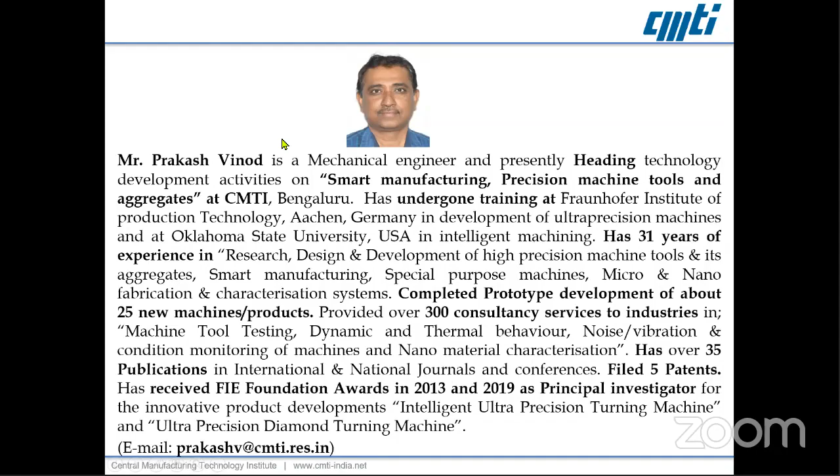He has undergone training at Fraunhofer Institute of Production Technology, Aachen, Germany in development of ultra precision machines, at Oklahoma State University, USA in intelligent machining, and has 31 years of experience in research, design and development of high precision machine tools and its aggregates.

He has worked in smart manufacturing special purpose machines, micro and nano fabrication and characterization systems, completed prototype development of about 25 new machines products, provided over 300 consultancy services to industries in machine tool testing, dynamic and thermal behavior, noise and vibration and condition monitoring of machines, and nanomaterial characterization.

He has over 35 publications in international and national journals and conferences, filed 5 patents, has received FIE Foundation Awards in 2013 and 2019 as Principal Investigator for the Innovative Product Developments, Intelligent Ultra Precision Turning Machine and Ultra Precision Diamond Turning Machine. For further specific queries, you may please write to email ID.

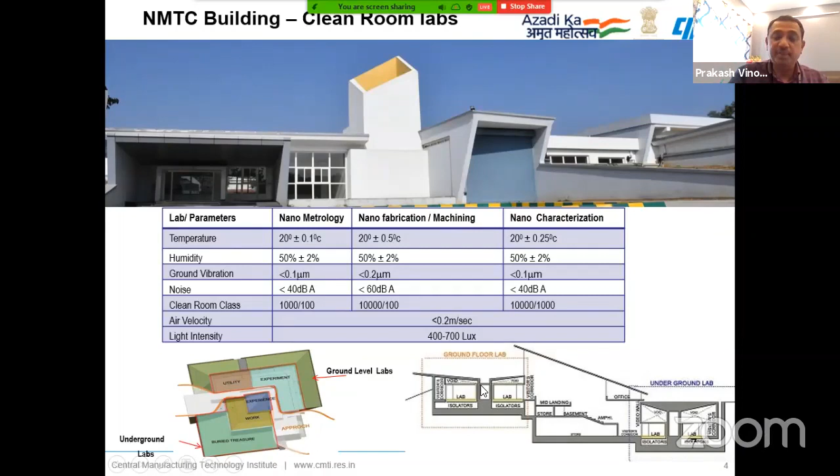Before I go to the technology we have developed and showcase some of the things, I just wanted to show what we have done. Some of the equipment we have procured is for micro machining and nano fabrication. We have around 10 high technology tools meant for nano fabrication work, around 15 high-end tools for nano characterization, and around 13 tools for testing purposes. These are the major tools housed in our laboratory. Apart from that, there are minor tools. In total, we have 50 plus tools available at our facility.

The building infrastructure, as I mentioned, is one of the largest underground facilities in the world, I think, in this country. There we have around 25,000 square feet of clean rooms where we are maintaining temperature and vibration very precisely. Temperature controls are in plus minus 0.1 degree. You may not get that anywhere, I think, in our country. Also, the floor vibration level is below 100 nanometers.

Again, it is state of the art technologies and all. So this is the way we have been working. Civil infrastructure also, according to that, was state of the art, to take care of these environmental issues, and the HVAC and all systems which are used for the clean room, that's also state of the art. So that's the way we have done it.

And our facility is housing 50 plus tools costing around 65 crores. So we have been doing a lot of product and technology development. Around 25 major technologies we have developed, which are already ready for technology transfer. And further we are pursuing this and continuing. We have filed patents and publications: patents 6, other IPR 4, publications 60 plus.

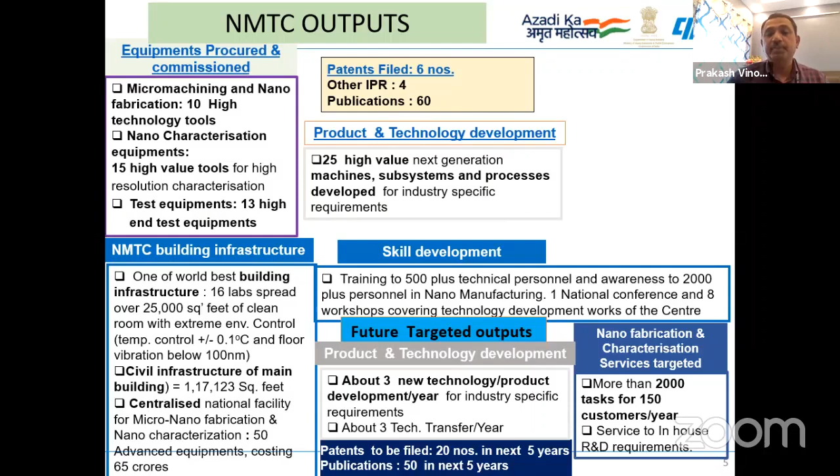And our services, this center has a customer database of around 250 customers from industries and major academia. More than 4,000 individual tasks we have provided and successfully completed. Basically, these tasks are R&D support to industries as well as to academia. Now our services are further growing, and we are targeting more than 2,000 tasks every year. That's the way we are looking, apart from the future technology development works from this center.

So now I will take you to some of the products and processes which have been developed at NMTC, what challenges we have faced, and how we have made this technology industry ready, because most of the technology we have developed has to be globally competitive, price wise and from an accuracy point of view. So we have to look into both.

It is not only a question of development of technology. We have also seen that these technologies are affordable as compared to imported technologies. Then only our industry will adopt this. So these are some challenges which we have looked into, and we have developed successfully. And I'm demonstrating some of the technologies, some of the success stories we are sharing with you.

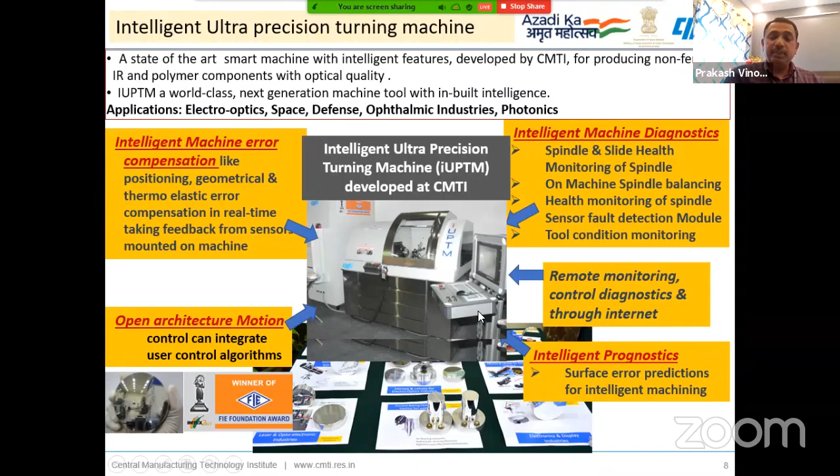So after the development of these modules, we implemented them in our machine and then validated them, like the thermal compensation techniques we adopted, and we started producing jobs which have a radius tolerance of 1 micrometer only. Earlier, after machining 5-6 jobs, it was going out of the range. After implementation of our thermal error compensation modules, we are able to control that error. So this is the way we have done that.

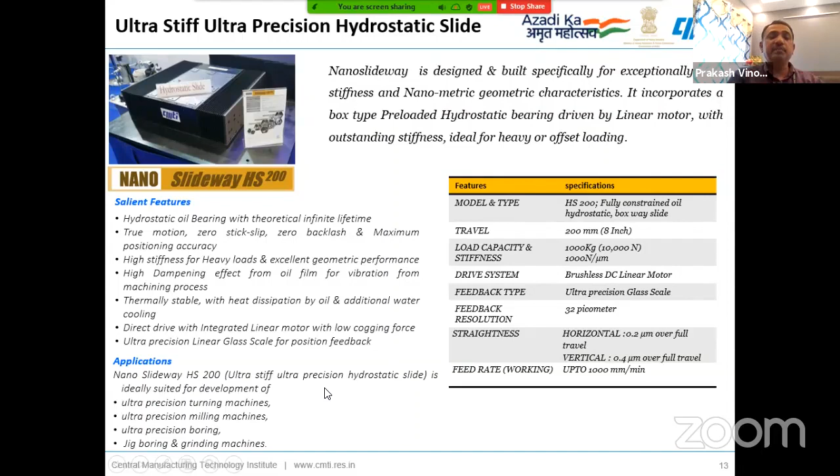So definitely, this slide we have used in our own machine. Plus, this slide technology is available to build other types of machines, such as high precision boring machines, jig grinding machines, jig boring machines, or very high precision milling machines. These slides can be used there also.

Likewise, the spindle. Imported spindles used for ultra precision machines are very costly. If we start importing spindles and building the machine, the cost will not be able to compete with global prices. So we have taken a challenge. In the first machine we developed, we used an imported spindle, but later in our Nano Shape machines, with which we are now targeting the industries, we have developed our own spindle.

So this spindle we have developed for our ultra precision turning machine, but it can be also used for ultra precision hard turning. It can be used for ultra precision milling and micro milling. It can be used for ultra precision grinding machines, and the bearing technology can be used for building high precision measuring machines like form testers. So that is the way we are targeting. We have done that also.

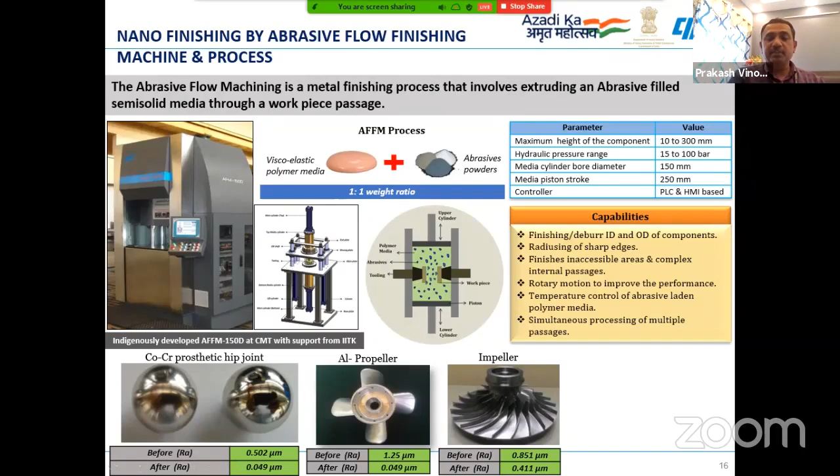Many components from industries, be it biomedicals like cobalt chromium prosthesis hip joints, or from aerospace and defense, propellers, impellers, many things. I think around 30 plus components we have proved on these machines. The technology behind that is a machine developed by CMTI with the initial help from IIT Kanpur, plus also the fixtures. The fixtures play a big role.

As you know, the media has to pass through the component in a proper way, so these are all done at CMTI. We have developed technologies to develop these fixtures, and the media also plays a role. Initially we used imported media, and now we are working on media development so that we are self-sufficient in all aspects.

Another technology, again for finishing, is magnetic abrasive finishing technology. There also we worked with IIT Kanpur initially. The concept is very simple. In this super finishing technology, we are creating a magnetic abrasive media based brush. If you provide proper movement to the job against the brush, then you can finish the component.

It looks very simple, but to realize it practically and make it useful has a lot of challenges. So we worked out how to make it more useful, because if we try to make a magnetic abrasive finishing machine itself, it will have limited use. So what we have done...

We developed an attachment which can be put on a milling machine. This attachment is based on electromagnet-based magnetic effect, and this can be put on the table of any milling machine, 3-axis milling machines. There we have created a cavity where we can form a magnetic brush like this, and then we can rotate the component and move it in this cavity against the magnetic brush.

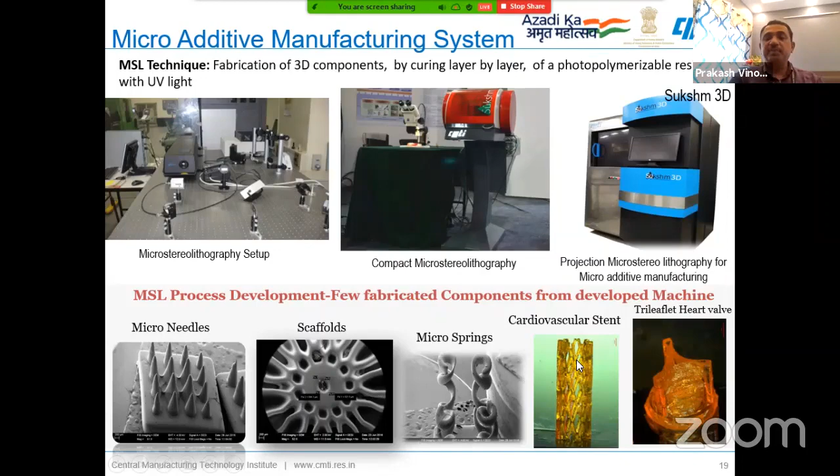We can do that in one shot. That is the technique we have developed, and this becomes a productive machine which industry can use to make cost-effective components. We have proven again that process development plays a big role, and we have proven the process on microneedle scaffolds for tissue growth, various types of MEMS components, biomedical components, stents, and many other things.

So this is a machine which we are marketing for industries. It takes the digital image from the 3D component, and step by step it slices it, and at each step it has its own CAD image that goes to the digital micromirror device, and based on that this works like a virtual mask. Based on the feature at that layer, the mirrors are turned on and off, and UV light falls on this DMD and is directed to the component and polymer resin, and then it is cured, and then it is moved up to cure another layer. That is the way we are building it.

This requires a machine mechanism. We have also created HMI software where the process parameters can be controlled. It is not easy - different materials require different process parameters, so we have to have versatile machines which can do all of this.

So with this, we could realize many components, and many industries can realize many components as well. That's the way we are looking into that.

Another area where we have been working is the development of nano characterization and fabrication systems. Nano manufacturing uses many nano fabrication and characterization systems which are imported. Even CMTI initially imported many of these things, but they are very costly, and technology development needs to be done in our country for that as well.

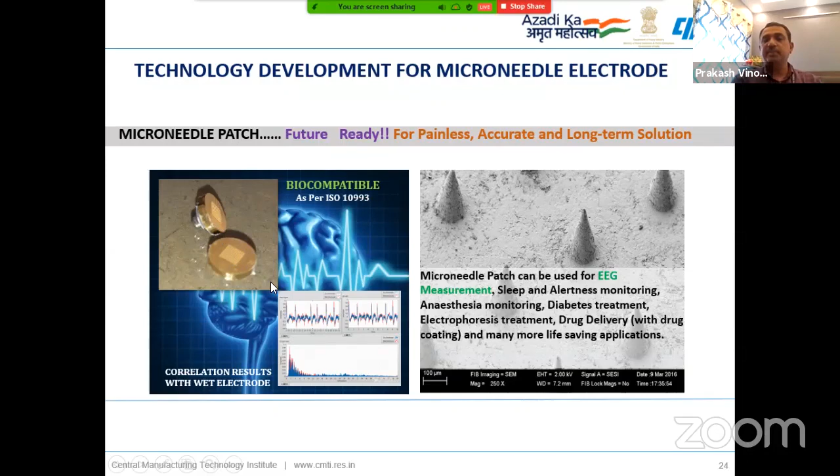If you create an array of microneedles and make it into a patch, it can capture biopotential, provided it is coated properly. Then it can capture the biopotential from the body, so it can be used for EEG measurement, or for sleep and alertness monitoring from the brain. We did benchmarking for EEG measurements and saw that the performance is equally good. So this microneedle electrode technology - using it, industry can create electrodes and supply them for different measurements, maybe for biomedical applications.

Another group works on surface engineering, focusing on thin film coating. Under NMTC, we procured thin film coating equipment, and with that we have delivered many industrial solutions through process development - for surgical equipment, knives, and for watch casings. This is DLC coating, diamond like carbon coating. Using DLC coating of different configurations, different applications are targeted - for watches we look at wear resistance and look, whereas for knives we require some toughness as well as wear resistance.

DLC coating is also used for guideways and for night vision lenses, where the requirements are different - there the coatings are used like a filter to capture the IR spectrum in a particular range. So various applications are possible just with DLC coating. Our team has done that. Likewise, CNT - we have grown CNT, and based on that, various process applications useful for industry have been developed, like super black coating, CNT based UV sensors, and CNT plus metal thermal interface materials, all developed at our center.

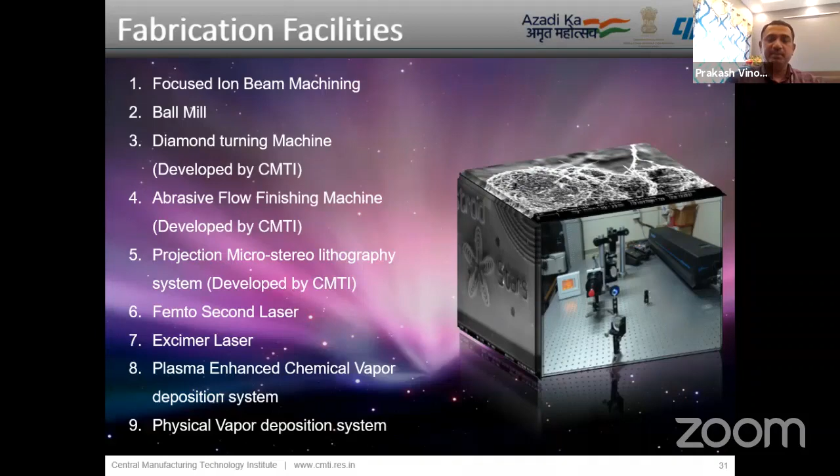It includes a variety of equipment for microscopy, whether optical microscopy, scanning probe microscopy, or electron microscopy using SEM and TEM. We have one of the high resolution TEMs at CMTI. For mechanical property characterization, we have a nano indenter and a micro hardness tester. For optical characterization, we have spectroscopies, interferometers, and other systems. For crystallinity and texture study,

we have XRDs. For particle size, we have a particle size analyzer and a surface area analyzer. We have full-fledged electron microscopy sample preparation tools, around 15 or 16 tools used for preparing samples. All these facilities are available for industries and academia.

Thank you. Thank you, Manju. Just start sharing my screen. Manju, whether my screen is visible? Yeah, your screen is visible. Yeah, it is in full screen. Yeah. Good morning to everyone.

Today I'm going to talk about single point diamond turning. It is basically an overview of the diamond turning process. Single point diamond turning is nothing but a turning process where we use a monocrystalline diamond tool to machine in a high precision lathe. It is also called an ultra precision diamond turning machine.

Here we will be able to get a surface finish down to nanometers and a form accuracy down to submicron level. This is done on a very high precision machine, so that there will not be any vibration or any geometrical and thermomechanical errors which get reflected on the component. You can see the mirror finish on the component. The surface finish is in the order of 5 nanometers or less.

So why diamond turning? For non-ferrous materials like copper, aluminum, and all soft materials, the other processes of lapping and grinding become very tedious, and you will not be able to get a very good surface finish and form. So diamond turning provides a very feasible and prominent process for attaining surface finish in the order of nanometers, and form tolerance down to 1 micron.

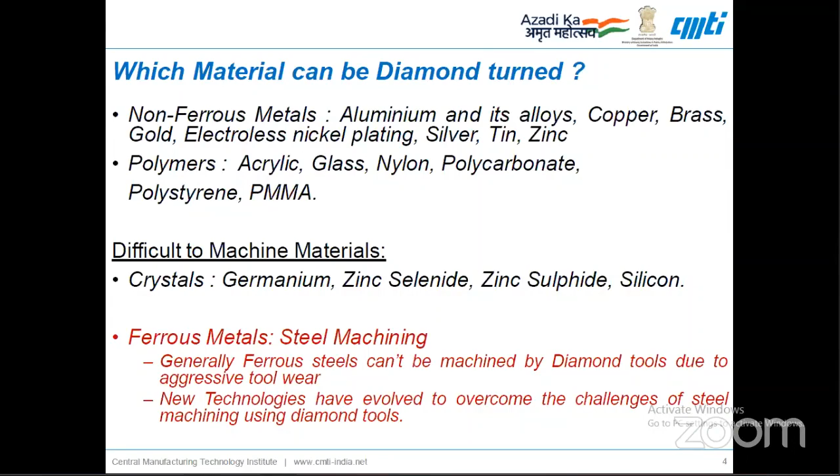So single point diamond turning plays a major role in advanced machining processes. Many of us may be using components made by diamond turning, but few may not be aware of the process as such. So I'll just touch upon the basics of diamond turning over 1 or 2 slides. Basically, in a normal turning process, when we try to cut a material, we'll be cutting along the grain boundaries.

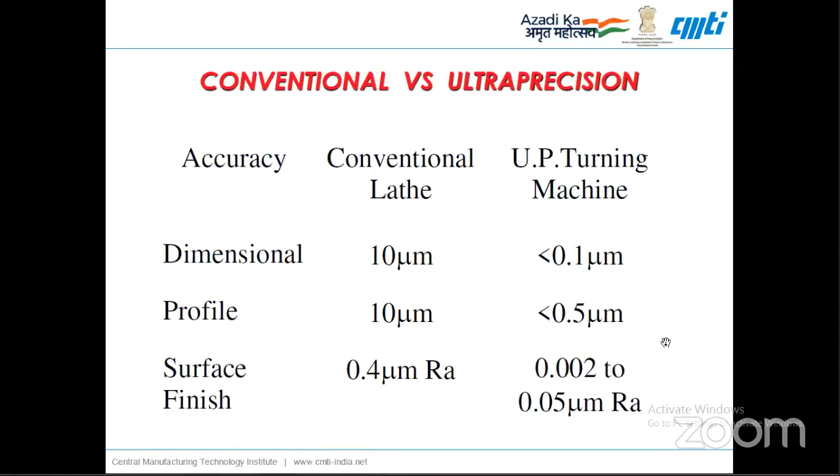So the tool plays a major role here. Basically, what we use is a monocrystalline diamond tool, not a polycrystalline diamond. The entire diamond is a single crystal. Because of that, we are able to have a very sharp edge radius, which makes the cutting very smooth and makes it very easy to cut the materials.

Like any other tools, here also you can have positive, zero rake angle and negative rake angle tools, and you can have a controlled waviness along the nose radius, because that defines what accuracy you can get on the component. And you have cylindrical clearance and conical clearance angles based on the finish cut or rough machining processes. As I was telling you, the edge radius is less than 15 nanometers or finer than that.

So the tools are classified into multiple classifications. The tool can be a monocrystalline natural diamond tool, or a synthetic diamond tool based on the requirement of the user. The profile can be of cylindrical or conical clearance. The waviness can be controlled or non-controlled. If you want to finish very high accuracy components, you may have to go for a controlled waviness tool. And positive rake angle or zero rake angle and negative rake angle are there for machining ductile materials and brittle materials.

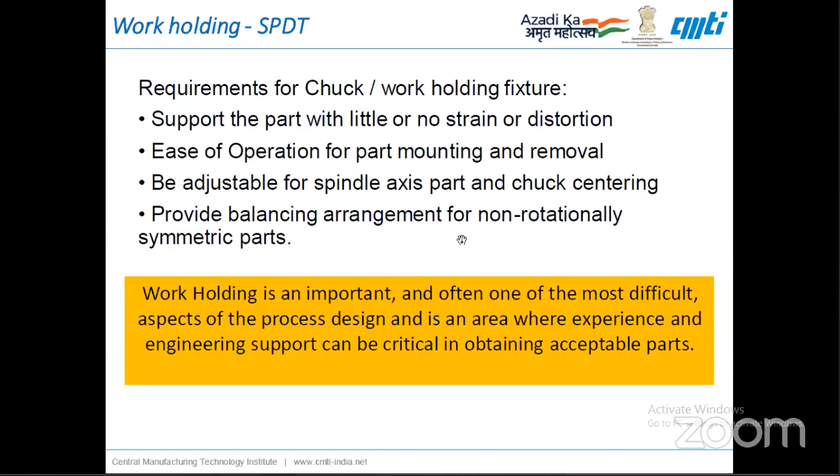And whenever we mount a rotationally non-symmetric component, the spindle rotation has to be balanced also. So the chucking mechanism should have a balancing provision in such a diamond turning process. There are multiple work holding mechanisms, and here we use a vacuum chucking process.

If such vacuum chucking fixturing is not available, when we machine a spherical profile and remove it, the component gets distorted in microns, which may not matter in a normal lathe process. But in ultra precision machining, it affects the component at the micron level, so your accuracies will be poor. So this chuck mechanism is very important in these machines.

And basically, there are multiple design criteria if you want to design your own work holding fixtures for this diamond turning process. It's not limited to rotationally symmetric components; we can also machine non-rotationally symmetric components by designing different types of fixturing for holding the component.

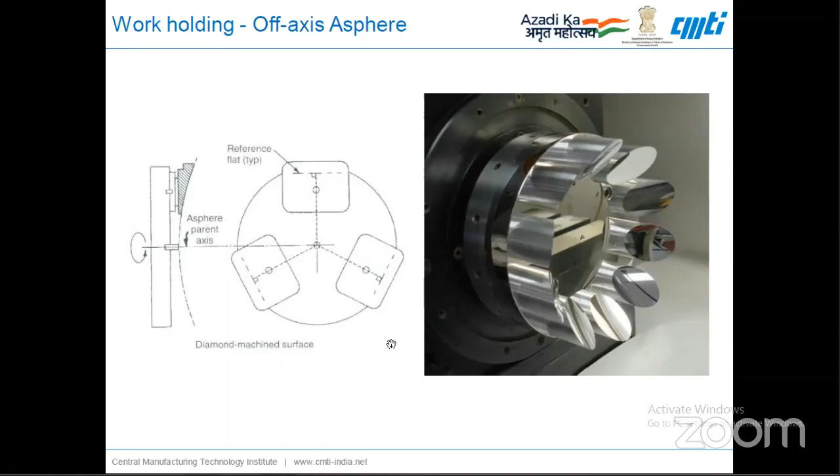Now we'll look into the component accuracies we achieve using the single point diamond turning process. As I told you, it can machine multiple materials like aluminum, copper, brass and so on. You can get a surface finish down to 1 and 2 nanometers in aluminum, brass, copper and other materials. And we can even machine silicon and germanium, which are crystalline materials, IR crystals.

When you try to machine these materials by other processes, they tend to have brittle fracture on the surface. But here we use a process called ductile regime machining, where we use a negative rake angle tool, which gives a very high compressive force on the surface of the component, like germanium, so that the surface isn't subject to cracks. This way we can machine a mirror finish on components like germanium and silicon.

So this can be machined with a very high compressive force using a negative rake angle, and other parameters like critical depth of cut and the process feed parameters also play a major role. The critical thickness for different materials is very important to get a very good surface finish on these brittle materials. So we'll have a look at the applications where diamond turning is widely used.

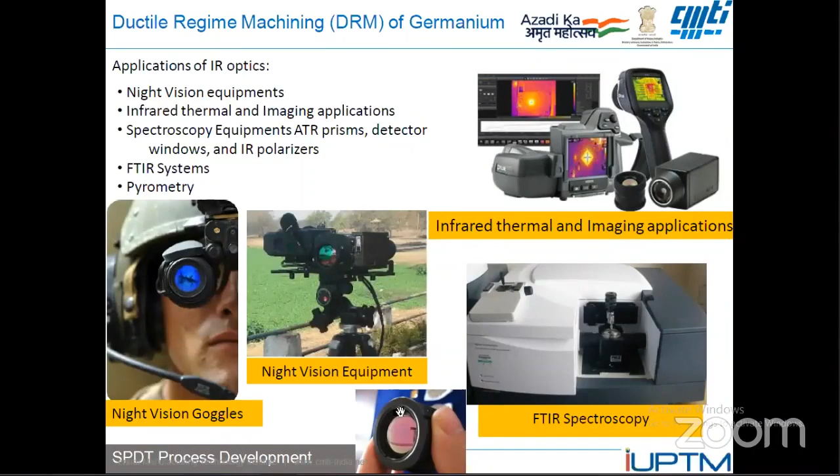And apart from that, in medical industries also, the intraocular lenses which they do for cataract surgery for older patients are also fabricated using this process with smaller single point diamond turning machines. And the contact lens molds are also manufactured using this process. And precision machined components are also done using the single point diamond turning process.

And the automobile light reflectors, and also the photonics application, the LED molds. These are all day-to-day application components which we see around us. So these molds are basically manufactured using this single point diamond turning process, and by injection molding they make mass production out of these molds.

As I was talking about the SPDT process, it is not only the process technology which is important here, the machine tool also plays a major role. It is not that if you put a diamond tool on a normal lathe, you'll be able to get a surface finish in the order of a few nanometers. So the machine tool also plays a major role here, as Prakash sir has earlier explained about the features of the machine.

So this machine has an aerostatic spindle system. Compared to a normal lathe where we use a ball bearing mechanism for bearing supports, here we use air bearing support for the spindle, and we use a hydrostatic slide mechanism for movement of the X and Z axis. That way we get very good motion accuracy of the slides and spindle.

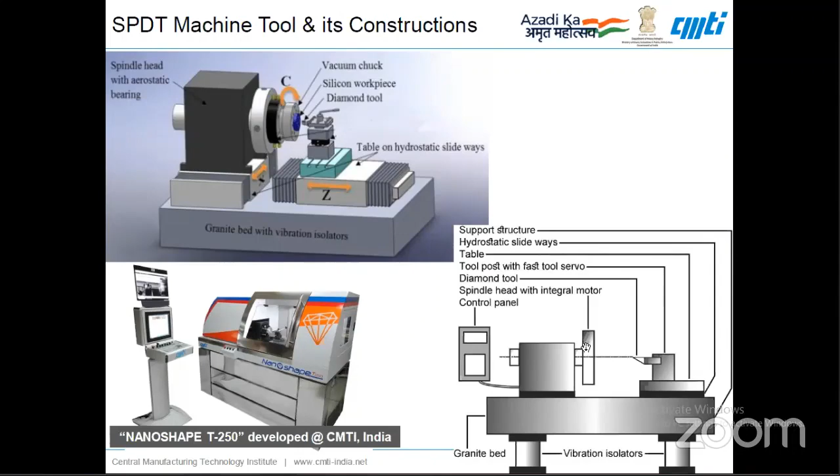As I was talking, there are multiple machine features which also play a major role, which I will not touch much further because our previous speaker has addressed these things, like the structural stability of the machine, the fluid film bearings like hydrostatic and aerostatic spindles, and the drive mechanism. The feedback system also should be of a higher accuracy. The geometrical and positioning accuracy of the machine should be in the micrometer range.

The machine should be able to isolate the vibration which is generated from outside, and it should have a very high-end motion architecture controller. The system resolution should be down to 1 nanometer, and we also should have a distortion-free work clamping system, and we can also integrate error compensation modules to the machine, so that the errors which come out of thermal effects during this high precision machining can also be eliminated in real time.

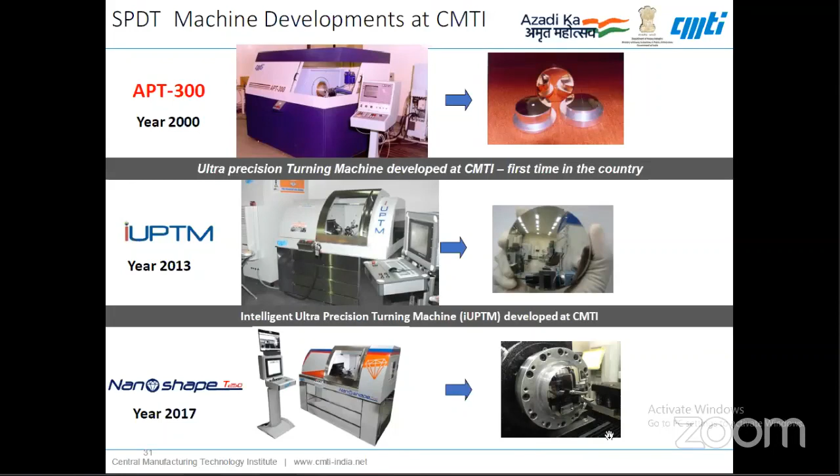This NanoShape T250 machine we have developed at CMTI, and it has been spoken about elaborately in the previous lecture. We can make all these diamond turning applications on this machine. CMTI has worked on 3 generations of development of this machine, and we have been working for the past 25 to 30 years in this technology. The latest launch is the NanoShape T250 machine. That covers the basics of SPDT.

Now I'll just touch upon the advanced diamond turning techniques evolving in recent years. Basically there are 3 classifications I've done: fast tool servo diamond turning attachment, laser assisted diamond turning attachment, and ultrasonic assisted diamond turning attachment. So we'll just start with the fast tool servo. Basically, as I was talking about

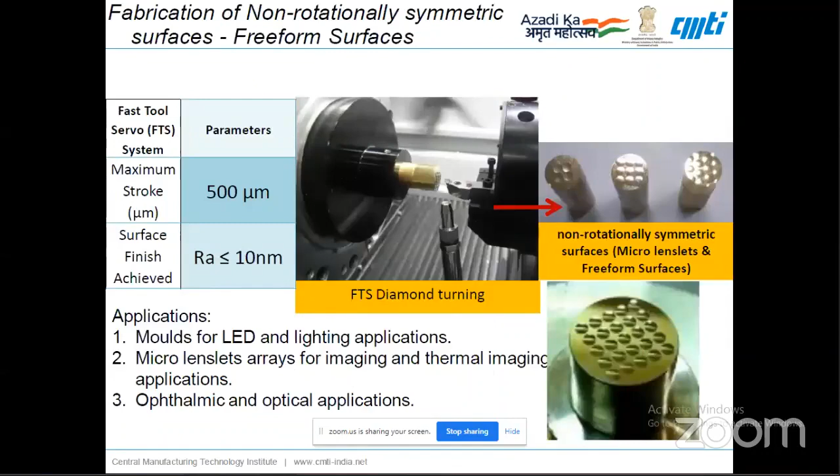As I was talking about the micro lens fabrication. With the fast tool servo mechanism we are able to machine non-rotationally symmetric components. You can see how well you can machine individual lenses on a micro lens mold, and you can also have a surface finish down to a few nanometers, and also a very good profile accuracy on these components.

Not only limited to periodic lens designs, we can also have multiple lens designs like honeycomb structures, and also the compound eye mechanism. These are all the latest advancements happening in the photonics area, and this research can easily be materialized by using a single point diamond turning process to fabricate these kinds of lenses and components.

The other advancement is the laser assisted diamond turning process, where laser light is passed through the diamond tool to machine the component. What happens is the laser passes through the diamond tool and locally softens the material. This laser assisted diamond turning is used for crystal materials like IR crystals, such as germanium and silicon, where tool wear is at a larger rate.

So what they do is use this laser diamond turning process, and it locally softens the material, and again we can machine the material like a ductile material. This is a very cost-effective process to have very good tool life on the component, and we get a very good surface finish. Using this laser assisted diamond turning process, silicon can be machined down to a few nanometers, and also silicon carbide, which is a very tough material, can be done using this laser assisted ductile machining process.

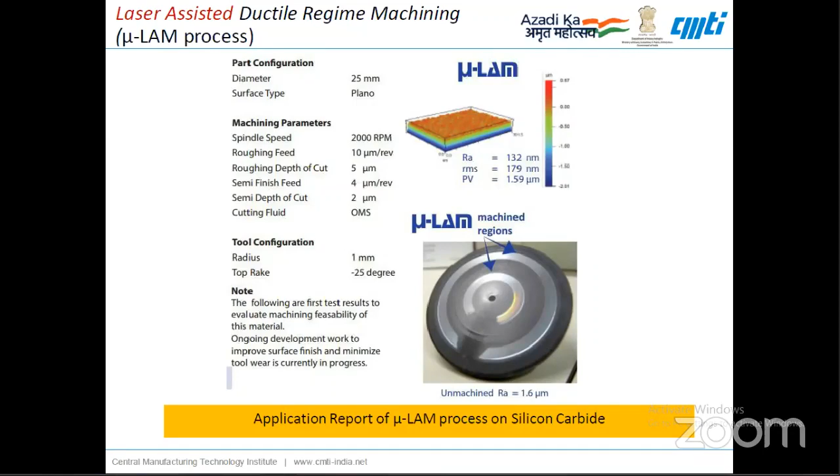One more advancement is the ultrasonic assisted diamond turning process. As I was telling, steel materials cannot be machined using a diamond tool. So what they do is locally vibrate the tool in the ultrasonic range, so that the tool vibrates in an elliptical form, and it will not be in continuous contact with respect to the steel material. This way, the diffusion wear will not take place, as the diamond will not be in continuous contact with the steel material.

So this way, we can machine the components also through the ultrasonic assisted process. There are attachments available in the market which can be bought and integrated to the diamond turning machines we have. The tool vibrates as per a sinusoidal wave, so there will be a very brief period of contact, and it keeps engaging and disengaging the component. The amplitude will be on the order of 2 to 3 microns, and you can machine all steel materials using this process, using a diamond tool itself.

With this basic lecture, I'd like to conclude my lecture on single point diamond turning. If there are any questions, you can post them to my mail ID, which is being posted by Mr. Manju.

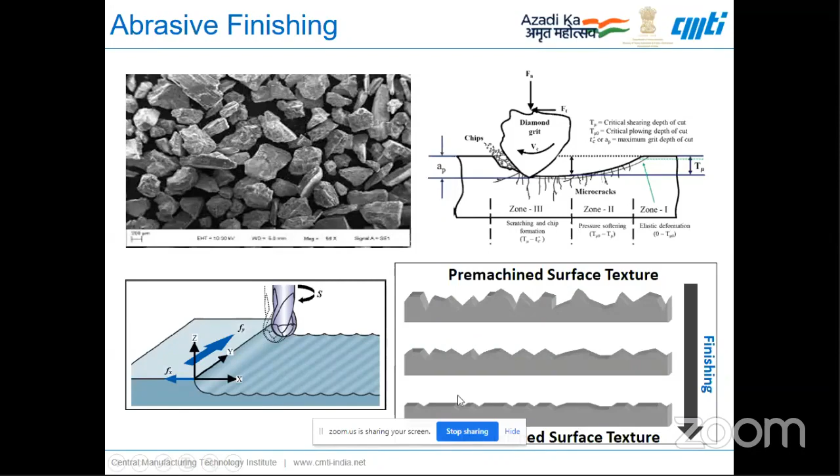How do we measure? We generally use a tabletop and handheld profiler. One must take care that we should measure perpendicular to the lay direction and not parallel to it. That is how we get the actual surface finish values, and some of the roughness parameters commonly used are RA, RZ, RT.

RA is the arithmetic mean, used to indicate the surface finish on any given surface. So when we see a profile created, it is going to have a form, a waviness, and a roughness, all converged actually.

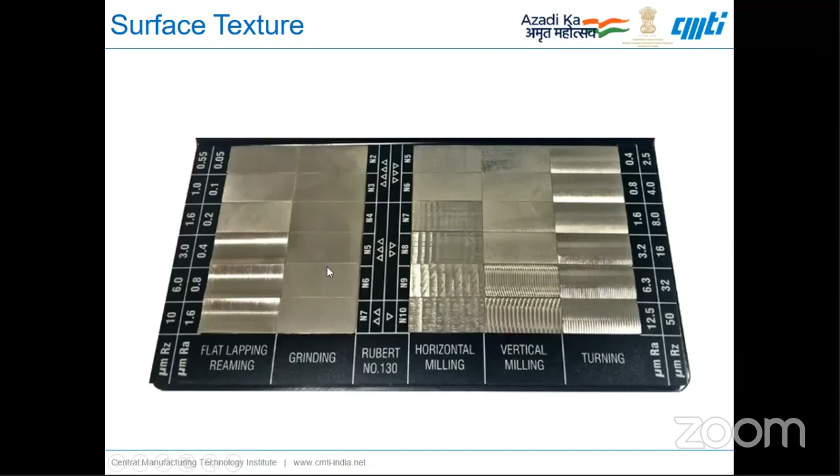You cannot see the lay direction with the bare eye once it reaches less than 0.3 and 0.2 microns. So why do we need this abrasive finishing process?

Sometimes there are different requirements. Sometimes in bearings we need friction to be reduced, sometimes wear has to be reduced, or a better appearance - like if you are doing plastic injection molding, you require a mold with a very good mirror-like finish so that the end component also looks similar. And reflection applications like telescopes and space mirrors, and also in cutting tools - some tools are lapped.

When we talk about nano finishing process, in a product manufacturing life cycle, there is a tendency that the finishing process can actually account for up to 75%, which is very significant. The reason being you need skilled labor, you need very high-end equipment, and consumables are also very expensive.

So when a designer is specifying surface finish in his drawing, he has to be judicious in specifying what is sufficient. If he specifies unnecessary values, it results in the product cost being on the higher side and not being competitive.

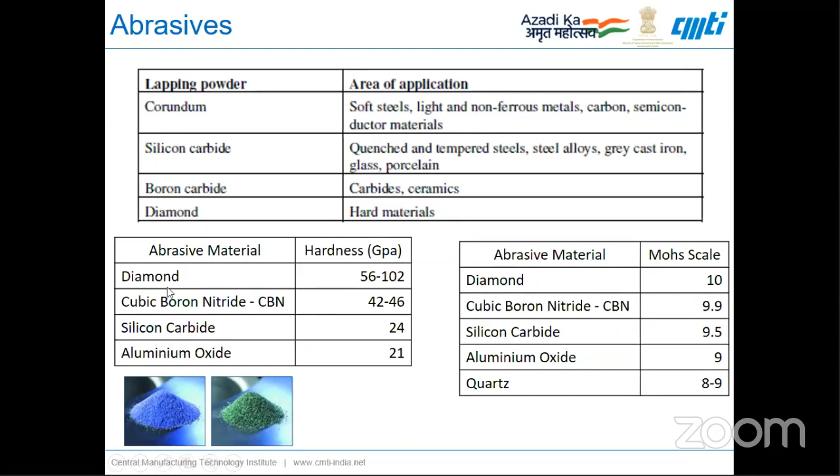Abrasives can range from softer aluminum oxide to the hardest, diamond. These are the commonly used abrasives.

Generally abrasives are very small because you are only going to remove a very minute quantity of material precisely. That is why we need finer abrasives. When we talk about abrasive size, it is mentioned in grit size, like numbers 60, 120, 220, 400, 800, and so on. The smaller the number, the coarser the abrasive is. So here you can see how the abrasive looks like - this is the coarser abrasive with a smaller grit number, and this is the finest abrasive with a larger grit number.

This is how the table looks like when we go for procuring abrasives.

I will briefly touch upon this process before going to some of the advanced processes CMTI is involved in. Lapping is like two surfaces rubbed together with abrasive between them. Both mechanized and hand lapping techniques are there, and we have abrasives mixed with lapping media spread in between the lap and the workpiece.

Generally a metrology artifact, like gauge blocks and all, are generally lapped to, I believe, less than 20 nanometer. That is when you can ring it properly.

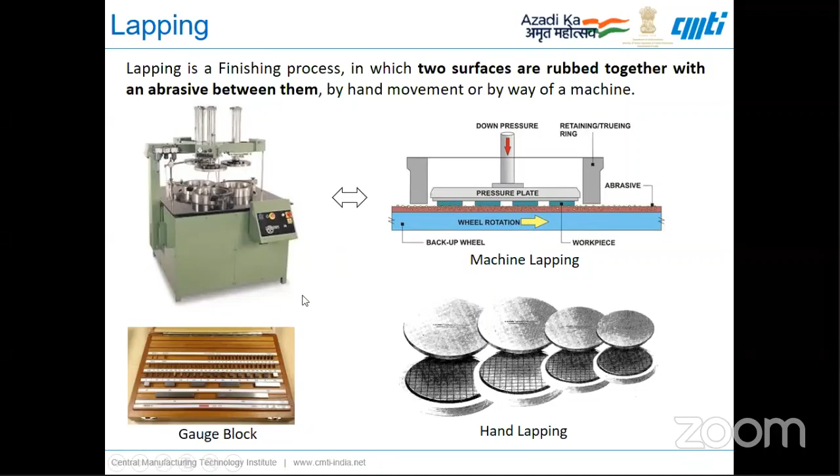At CMTI, a spherical lapping attachment has been developed which can be fixed to any lathe, or it can also work independently. Generally these spherical artifacts are used in metrology, one such application is even CMM calibration. These spherical components also have application in the biomedical field like hip joints and all. So we have developed a spherical lapping attachment which can achieve less than 0.5 micron sphericity.

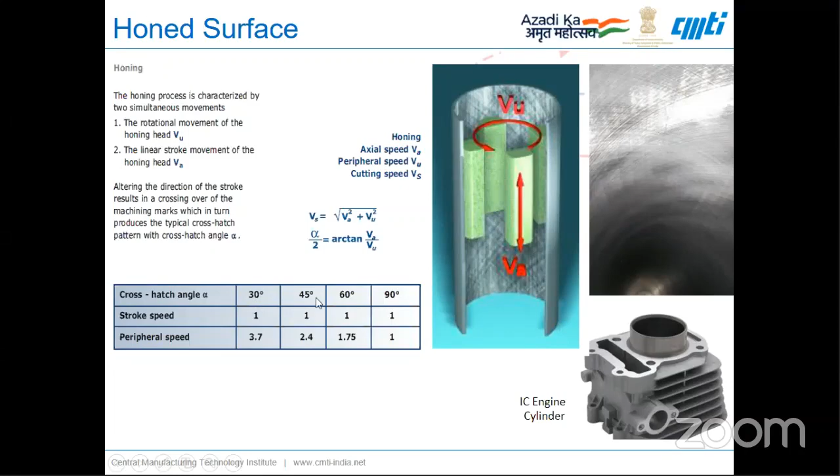When we are talking about engine cylinder liners, we actually require bearing tribological property. We want the surface to retain oil, so that the motion is smooth and no seizure happens. So you have to plan initially: the peaks are removed using a smoother honing tool, and then later on, the metal that has become embedded in the cross hatch is removed with a very fine smoothing tool. So series by series, we remove material so that we leave some serrations where oil can retain. If the same thing is done by lapping, which is also possible, you will end up with a very fine surface, and you may not have bearing tribological properties, and heating may happen.

These are some of the hydraulic components and machine tool components where honing application is there.

Now in real life, the components are not cylindrical or flat. The components are much more complicated, like a knee joint or a hip joint in the biomedical area, or in automotive, like manifolds, fuel injectors, various things, and in aeronautical components, impellers, and some hydraulic components, manifolds, and also in so many machinery components. They are all not very easy to finish by these traditional lapping and honing techniques.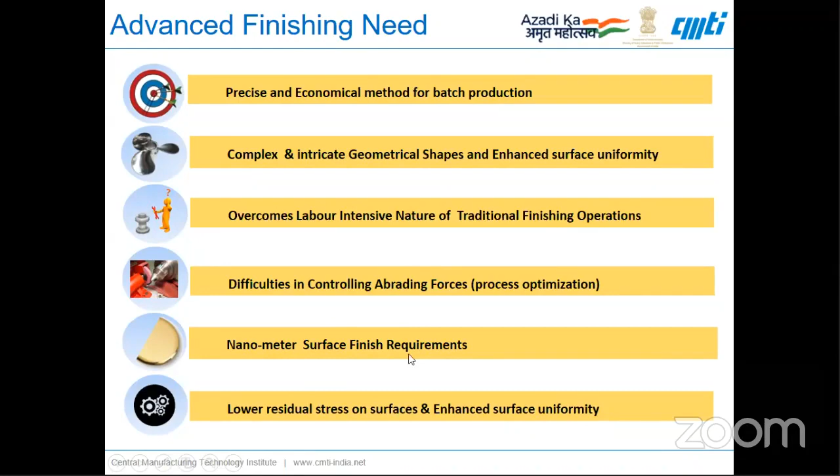That is when we need advanced finishing methodologies for a precise and economical way of batch production of complex and intricate geometrical shapes, and also to have uniform surface finish, to overcome the labor-intensive nature of traditional finishing operations discussed earlier, and for better process optimization whenever required, nanometric surface finish requirements, and lower stresses in the job. These are all various requirements that arise.

So CMTI has developed the abrasive flow finishing machine AFM 150D. We will discuss this. The machine is capable of working at up to 100 bar pressure, and it also has facilities like a rotary work fixture, and temperature control is possible to adjust the viscosity of the media. The features of this machine are that you can do finishing and deburring of ID and OD of components, radiusing of sharp edges and inaccessible areas, rotary motion to improve performance, and temperature control.

So with abrasive media, generally we start from coarser. It's a polymer viscoelastic media. We mix it with abrasives at a 1:1 ratio, and initially we mix it with coarser abrasives, and like any other finishing process, we try to remove the peaks, and then we go for finer and finer abrasives and try to achieve our desired surface finish.

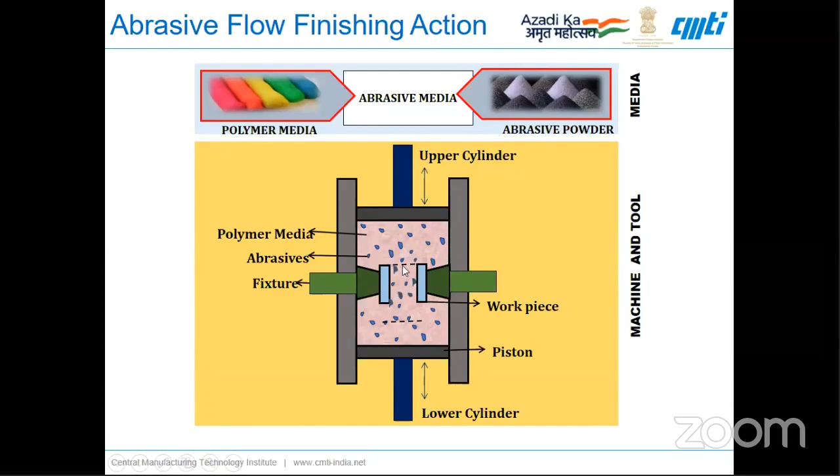So basically the machine has two cylinders in between which the polymer media mixed with abrasives is made to reciprocate up and down, and this simple cylindrical hollow tube work component is shown here, within which the media tends to move up and down. So after various cycles the job is finished. Basically the media is a viscoelastic media. So the elastic component tends to have a radial force and the viscous component tends to have the axial force. That is how the inner wall of the component tends to get finished.

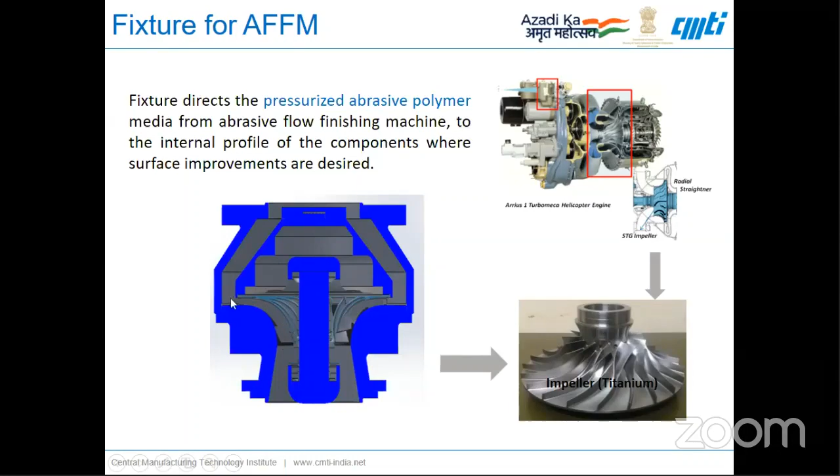So regarding the market potential of AFM, generally it will overcome time-consuming processes. Also the finishing cost here is significantly lower compared to other processes, and we are able to finish high precision components in an economical way. So far there is no indigenous development of such a machine. Worldwide, only one or two makers are there at present making such machines, and they are in heavy demand. Technological solutions: aerospace, defense, medical, automotive. We are also serving academics. We are providing finishing service.

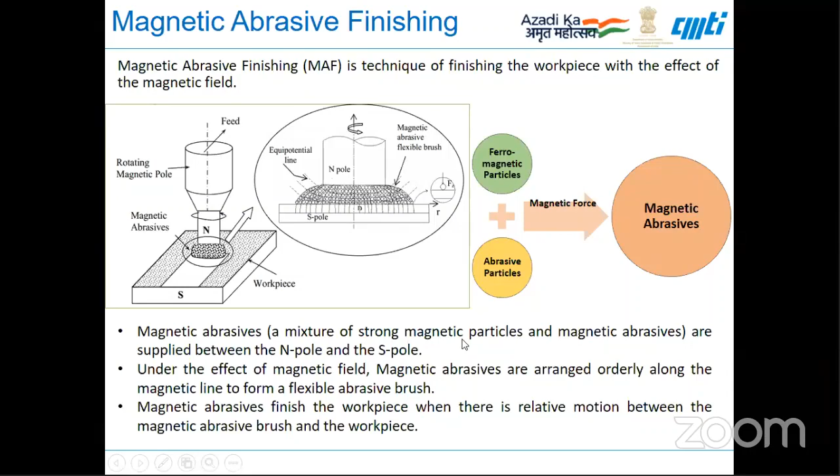Next super finishing process, an advanced finishing process: magnetic abrasive finishing. When we talk about a magnet, there is a north and south pole and the lines are flowing between these poles, which we are aware of. We make magnetic abrasives which are attracted to these lines, and then through relative motion between the tool and the workpiece, finishing happens. The media is a special media developed by combining magnetic particles along with abrasives, because as we know the abrasives are non-magnetic.

This is for some trial components, and internal components also we can finish. So the finish value up to 20 nanometer is achievable. Ra up to 20 nanometer is achievable on all these components. So you can see the media, how it is attracted between north and south pole inside the cylindrical tube, and when we rotate the job, the finishing happens.

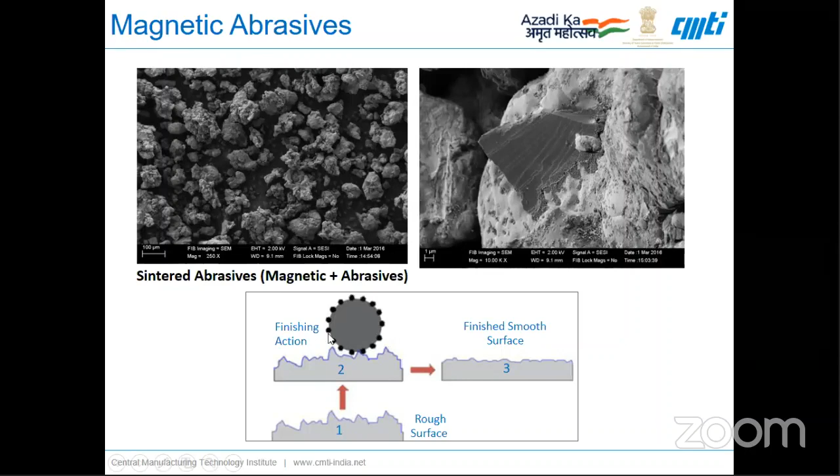We have developed abrasive media. Okay, so this is a magnetic abrasive media. Initially, we have sintered and broken into particles. So here we can see how the abrasives are projecting all across the media. And initially, we will have a rough surface with several peaks, and then this is an abrasive particle with abrasives along the outer surface. So after the cutting action, we achieve the smoother surface.

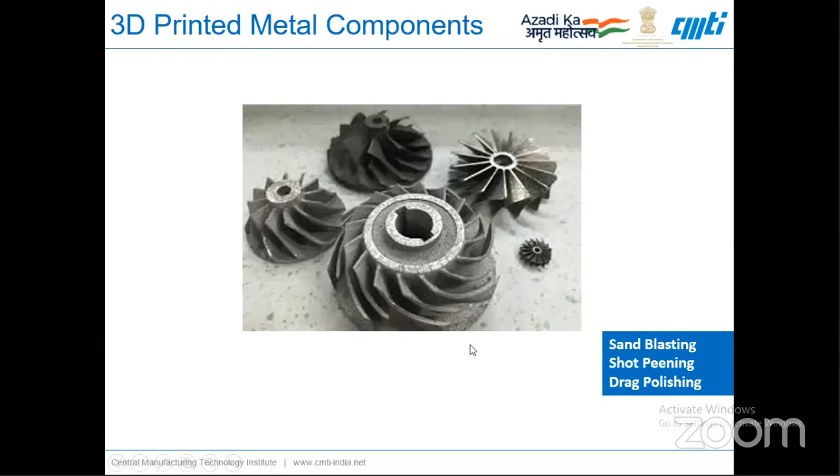So now I'm finished with whatever areas we have worked on at CMTI. Now I'll give a short glimpse of real life components and how to finish them. 3D printed components generally are known to have very high roughness values because of particle size limitation. So generally, to start with, we have to have sandblasting, shot peening, and drag polishing to reduce the surface roughness, and then we can go about with AFM or other finishing processes.

So for cylindrical tubes, there is an alternative like the electropolishing process where we can again achieve very good surface finish, but the only drawback is uniformity is an issue in electropolishing. When it comes to optics, I think SPDT has been discussed already in a previous lecture. The alternative with respect to abrasive finishing is that fluid jet polishing techniques and bonnet polishing techniques are available, which are again able to provide a nanometric surface finish.

Belt grinding is again a process where coated abrasive belts are used. It is a very versatile process. It can be used up to say 100 nanometer. We can have surface finish on flat and cylindrical components and other intricate shapes.

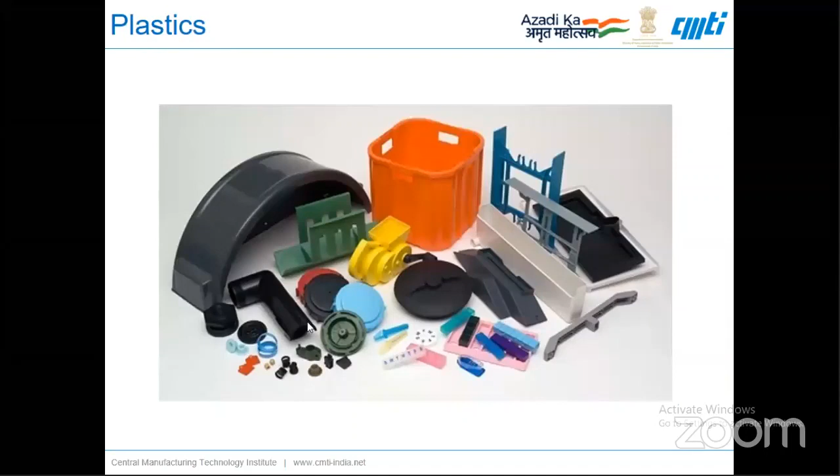Now, what about plastic components that we see in real life? Plastic components generally arrive from molds, which need to be finished. And though there are so many advanced nano finishing mechanized processes existing, people still tend to do it in a manual laborious way using bristles and brush type tools, handheld tools, which has a scope to improve in future by adopting these advanced techniques like AFM.

And generally polishing is one thing where actually material is not removed, unlike any other super finishing process. It just gives the luster on the surface. Because in polishing there is only rolling and sliding, whereas in other finishing processes there is rolling, sliding and cutting, and cutting is the major thing. So this only removes the top peaks and enables light to reflect. So it is not a super finishing process, but for many applications it is good enough.

So to begin with, these are some of our activities. We work basically on diamond-like carbon, carbon nanotubes, and also we synthesize metallic thin films. In diamond-like carbon, we work on night vision applications, high hardness, hydrophobic, and low coefficient of friction. In carbon nanotubes, we prepare super black coatings, sensor heads, and now currently we are working on rapid cooling technologies, that is thermal interface materials. And metallic thin films, we do basically micro heaters, catalyst layer coating, and also for metrology applications.

We have basically two equipment, a plasma enhanced chemical vapor deposition and a PVD. So we have our product called Kavach DLC, which we have filed for a trademark already, and that is with respect to our diamond-like carbon coating.

So today's contents are going to be, because we have only about half an hour, I'm going to introduce surface coating, surface engineering, a few applications of that, and talk about CVD, PVD, and what systems we are having. Just introduction to CVD and PVD, and then I'm going to talk for a while about the coating activities that we undertake at CMTI.

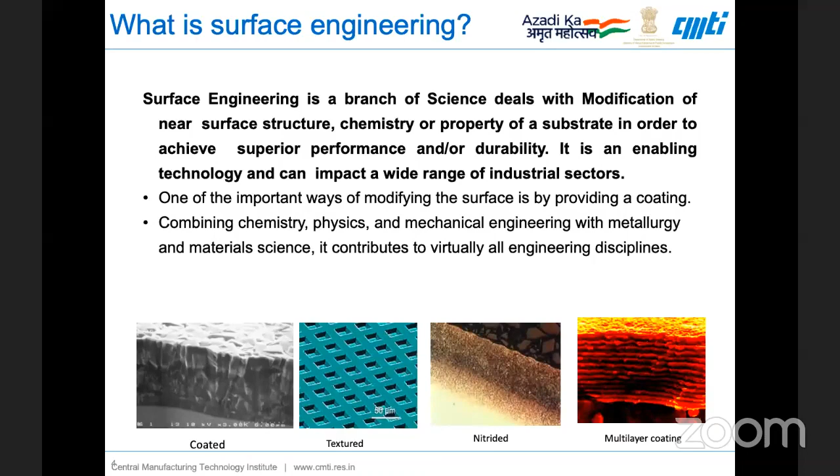So today what we are going to emphasize is on coatings, essentially. What basically a coating is, in simple terms, is a layer of material or fluid that is applied to a surface of a substrate to impart a functional property such as wear resistance or corrosion resistance, or hydrophobic nature, etc. A coating can also be applied to impart aesthetic value to the product.

So what is surface damage? When we talk about surface damage, it is something like you keep a material in rain. That's an environmental issue. If you keep a block of iron in rain, what will happen to that? Due to humidity, oxidation, rain, or icing, there will be change on the surface of the iron block. It will start rusting, it will start corroding. You will see that rust forms and small pieces of rust come out. This is because of environmental issues.

Let's say you bring it near a flame, then it has a different sort of surface damage. If you increase it to high temperature, then there is another sort of damage. So let's say you dip it in acid, or you dip it in an alkali, or you expose it to some salt. Then you have different kinds of damage. So probably it eats away or forms a different sort of layer, or you find some sort of white formation on the surface.

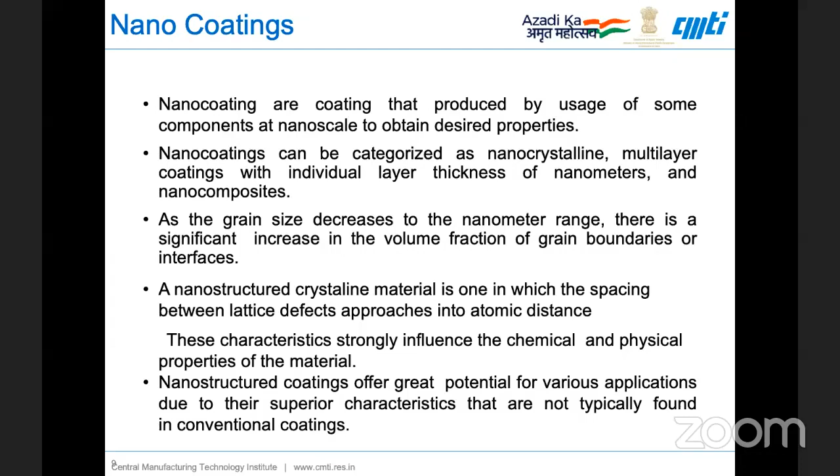In fact, even today, even your toothbrushes have some sort of nano coatings. The bristles have some nano coatings so that you are able to remove the plaque very easily, and so on and so forth. So what are the essential differences between conventional coating and nano coating? Conventional coatings are usually micron to mm scale structures, whereas nano coatings are nanostructured materials and are in nanoscale thicknesses.

Conventional coatings have high contact tension between the water droplet and the coating layer, whereas here contact tension is much reduced, and you can have water repellence sort of phenomena. With conventional coating, moisture can penetrate into the housing.

So let's say you are still having an electroplating, and you take a microscopic image, by which I mean an SEM image. Let's say you have done a chrome plating on steel; you will still find a 1.5 to 2 micrometer gap, which is not possible to see using naked eyes, and hence even moisture can penetrate through that small gap.

Whereas nano coating is basically atomic addition, and hence it's absolutely a zero gap sort of phenomena. And that's why it's much better. You won't have any sort of moisture penetration there. Of course, surface roughness is typically based on the sort of coating that you achieve. And 5 micrometer, it's not 5 micrometer exactly. It depends on the sort of process, and it can range anywhere from a few microns to even 25, 30 microns.

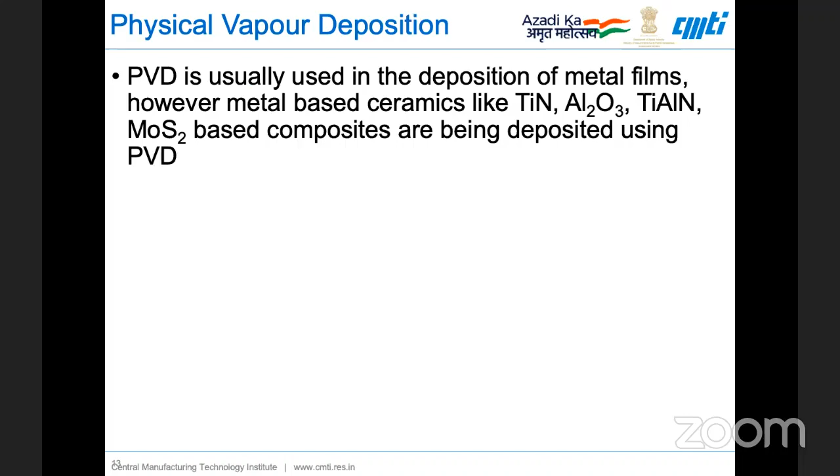Whereas with physical vapor deposition, it's basically a physical target that you are having, and the physical target is etched out when you let some sort of gas inside, and this is physically transported from one place to another, and then you are able to deposit metal, ceramics, and even titanium nitride, aluminum oxide, titanium aluminum nitride, molybdenum disulfide, etc. And you can start making composites using this.

So PVD processes are now widely used for making coatings. For example, there are a lot of companies which make gold coated god artifacts. So if you have some god idols, they do a thin film pure gold coating of about a few hundreds of nanometers on that to give that gold feel.

Gold coatings are also done on a lot of jewelry. For example, there are certain costly watches where they coat gold on straps and on the watch case. So with respect to aluminum or titanium, these are also done for various other applications.

Talking about the pros and cons of this process, it has excellent process control, low deposition temperature, dense and adherent coatings. You can play around with different alloys, and different compound coatings are also possible. PVD processes are typically vacuum processes, which come with a certain high capital cost, and then they have size limitations as well, and low coating rates.

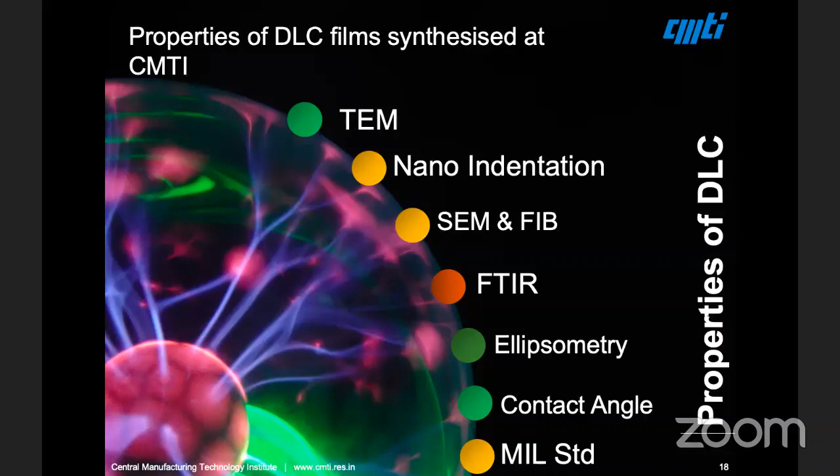Some properties and examples that we have developed, I'm going to show you in the upcoming slides. The TEM image of how diamond-like carbon looks like, you can notice the distance between the lattice points here. The D-space corresponds to about 0.205.

This corresponds to cubic diamond, and you can see some sort of a crosshatch structure here, which signifies that it's kind of polycrystalline in nature, and these are all the amorphous regions of the entire film. The hardness value when we experiment with what CMTI has developed, the mean hardness is close to about 32.7 GPa, and the coefficient of friction goes down to as low as 0.04. This shows how the coating looks like.

This is one layer, this is silicon wafer until here, and beyond this is diamond-like carbon. These are the two layers of coating, and you can see how well this region is, you will not find any sort of gap here. It's atomically bonded.

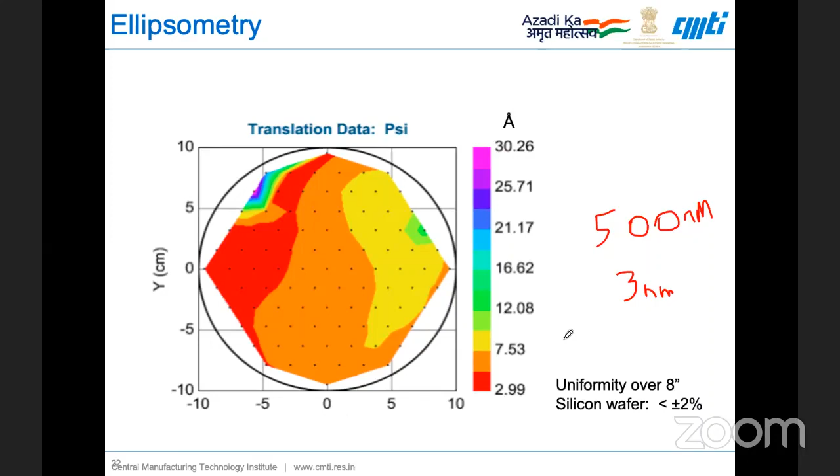This is useful when you coat diamond-like carbon on solar panel protection glasses. What happens is that you have rain, sand, abrasive particles, and you want to self-clean it, so that way you have to form beads. When there is a certain angle, if you treat it with a very fine thickness of DLC, there is some transmission available, as well as the water beads out, cleaning the surface. That is where these applications are useful.

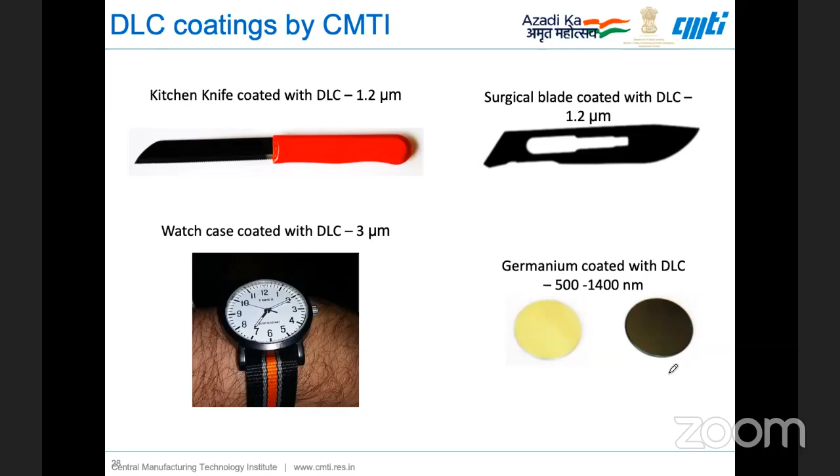This was for night vision camera lenses that we have done, coated germanium, for one of the American customers. As I mentioned two slides ago, DLC had to be coated for both hydrophobicity and also scratch resistance on solar panels. So this is what we have proposed as a solution, which is possible even on glass.

This is for low coefficient of friction, wherein for machine tool applications, you need guideways which do not have backlash and are extremely smooth. These are the places where you can coat with DLC. You can also coat it on plastic as an underlying layer so that you don't have scratches on the plastic. This was a research which, if I'm correct, Nokia started for their mobile phone bodies a long time ago, but I'm not too sure.

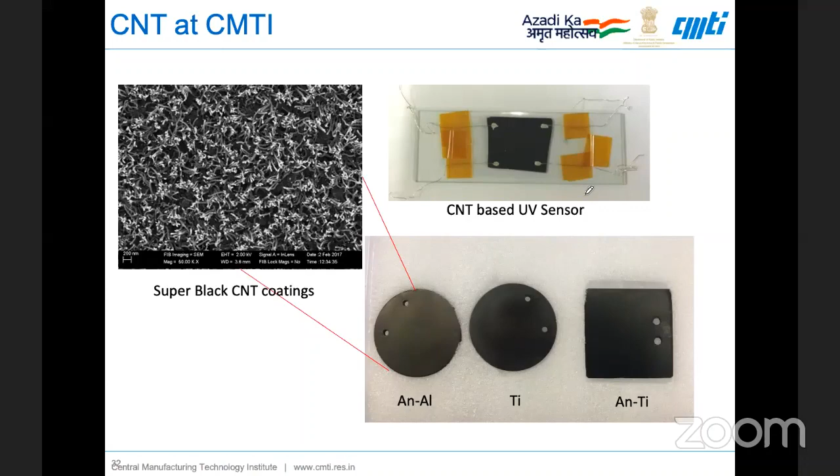We also have the CNT based UV sensor that we have developed for applications such as engine combustion monitoring, to predict whether the combustion is going on properly or not. This is one of the applications we have developed. It's just a sensor head, followed by encapsulation of CNT using DLC.

This is basically for a thermal interface material that we have been trying around. We have the TEM of that and how it looks, just to show there is both the CNTs as well as the DLC which have been formed. This was my cover image of today's presentation, and this is titanium nitride.

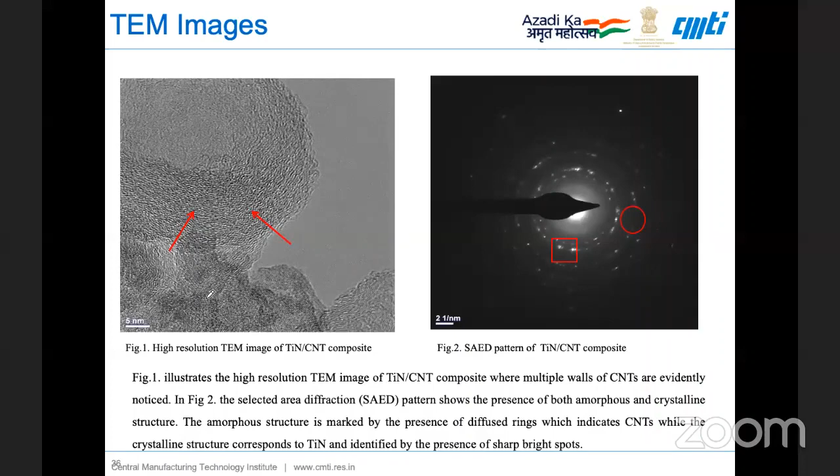So I'm not going to go ahead further.

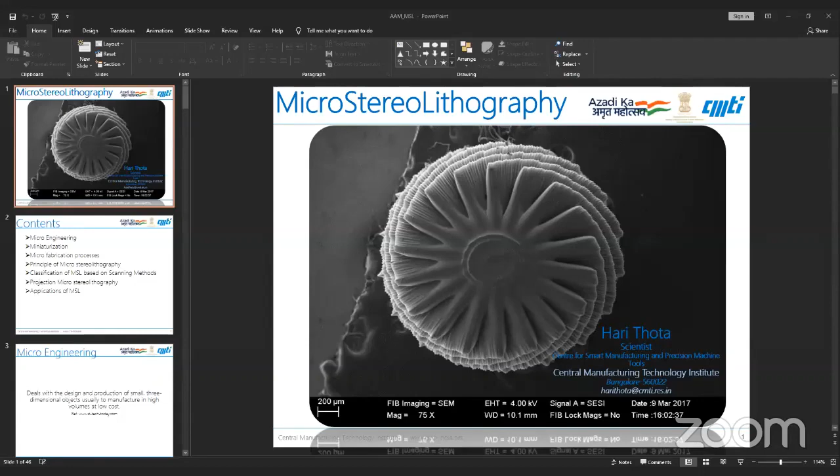Yeah, fine. I'm going to present the topic microstereolithography. Hope my screen is visible. Yes, it's visible. Thank you, Mr. Manju, for the introduction. I'm Harikrishna Satish Thota. I'll be presenting on microstereolithography, focus and applications of microstereolithography. The content will include microengineering, miniaturization, microfabrication processes, principles of microstereolithography, and classification of scanning.

Sorry for the interruption. Hello, sorry for the interruption. I think the audio can be a little clearer.

Louder. There is a slight breakage in the voice. Yeah. Is it okay? Okay. I'll try to fix it up. Yeah. So is it okay now? Yeah. Now it's fine. Thank you.

So, microengineering. Basically, microengineering deals with the design and production of small three-dimensional objects, usually manufactured in high volumes at a low cost. This definition is taken from the reference given here. Generally, we need miniaturized versions of things. Earlier we were using very big mobile phones with limited features. Now we are using mobile phones that are very handy and have multiple features in the phone itself.

So miniaturization is a key technology for making devices smart as well as more efficient. Here I'm giving an example of a blood cell analysis machine. This uses a micro cell cartridge. This tabletop equipment can be miniaturized by using a microfluidic chip embedded in a device which can be connected to the mobile phone, and the diagnosis can be done with a drop of blood, and the entire report can be seen on your mobile phone. This has happened because of miniaturization of certain technologies.

Not only in electrical and electronics engineering, but also in mechanical engineering and materials processing technology. These are the advantages of miniaturization: easy to handle, easy to mount, low cost, saving of material, saving of power. It will be fast and easy to integrate, saves space, and leads to volume production. There are some disadvantages with miniaturization also. The first is that expertise is required.

Suppose you want to fabricate complex microfluidic chips, micro devices or lab-on-chip kind of things. You need a lot of expertise, possibly from different domains. The fabrication is complex; you need very complex fabrication technologies to make these things possible. They could be use-and-throw kind of devices, which may cause environmental hazards. This is one disadvantage of miniaturization because of low cost, and maintenance is not possible in some miniaturized devices. These are all meant for use and throw.

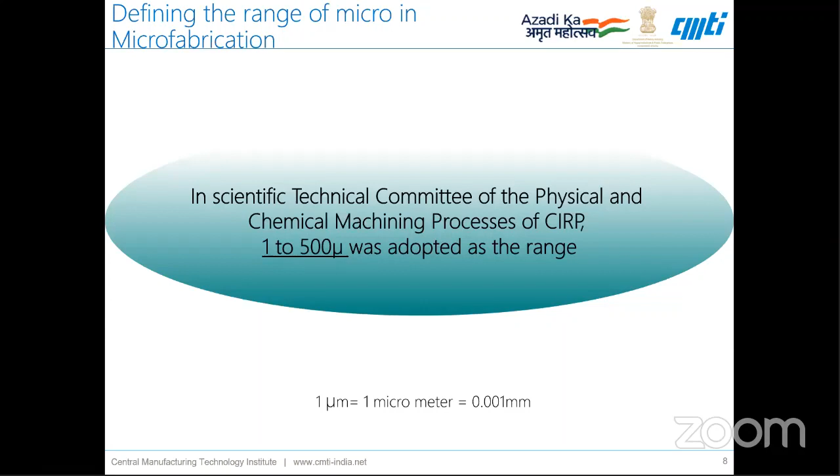That means if you are fabricating a macro device having micro features ranging from 1 to 500 micron, that would be called microfabrication. Or if you fabricate micro devices or micro components in the 1 to 500 micron range, that is also called microfabrication. That range is given by CIRP. Microfabrication is the foundation technology to realize miniaturization.

Coming to today's topic, micro stereolithography. Micro means very small, and per CIRP, fabrication ranging from 1 to 500 micron is given as microfabrication. In stereolithography, stereo means 3D and lithography means writing. The process uses a laser beam or patterned UV light to create 3D micro components. That is the reason it's called micro stereolithography.

There are two different types: the scanning type MSL process and the dynamic mask type MSL process. In the scanning type, the laser scans point by point and solidifies the photocurable resin, so you are able to fabricate a micro component. The dynamic mask method is completely different. Here the entire layer is projected with patterned UV light, so the entire layer will be cured in one shot. That is the difference between the scanning method and the dynamic mask method.

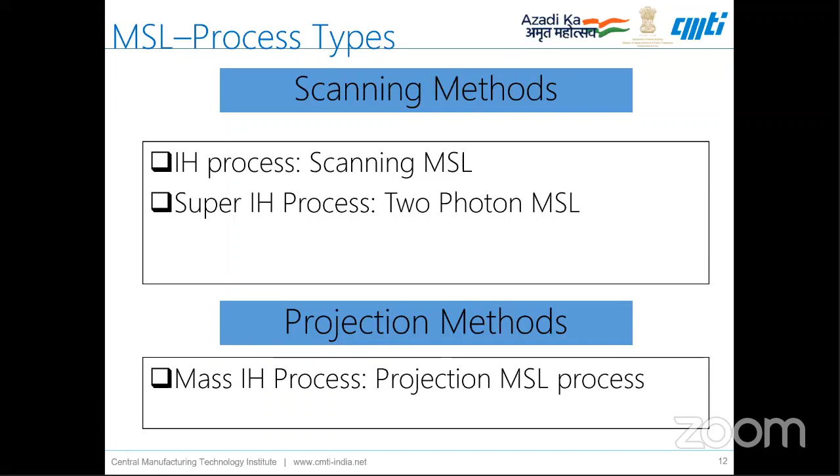So basically, in scanning MSL, the scanning takes place layer by layer; actually it scans point by point, and it completes layer by layer. The focal point of the laser remains the same. The layers are integrated. So this is the typical overview of the in-house developed setup in CMTI in early 2010.

This uses a laser basically. This laser diameter will be around 3 mm. The 3 mm diameter laser is passed through the AOM, the acousto-optic modulator. The acousto-optic modulator diffracts the laser into four orders. The second order diffraction is captured on the reflecting mirror.

That will be passed through the beam conditioning optics, the so-called beam expander, and a certain set of apertures and lenses, so that at the end of the projection you will get 50 to 100 micron. Maybe you can further scale it down to 20 to 30 micron diameter of the laser. That laser will be scanning a photocurable resin. So this is a basic overview of the scanning MSL based technique.

The scanning MSL based technique uses a CAD model basically. The CAD model, which is developed in CAD modeling software, will be sliced into layers. The layers will be used for part generation. After part generation there will be post curing, and then we will be giving it for user interface. This entire setup was built at CMTI, based on a LabVIEW based control setup.

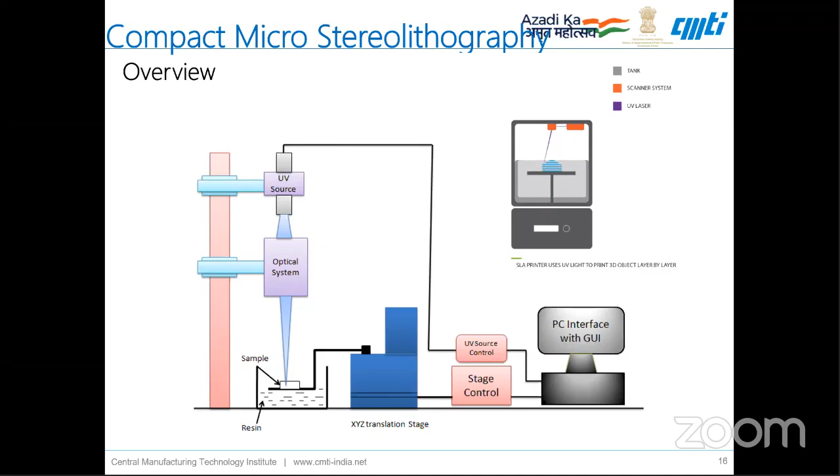The program will be loaded to the control PC, which will pass the control commands to the stage as well as the laser. The stage will be moving in XYZ directions, and simultaneously the laser will be focusing on the photocurable resin. The basic process is called photopolymerization. That's what happens to get the part fabricated.

Photopolymerization basically is a chemical reaction process which happens when the photocurable resin interacts with the laser beam. Here, the basic chemical used is HDDA, hexanediol diacrylate, which is mixed with the photoinitiator, benzoin ethyl ether, used as a catalyst for the chemical reaction. That will be mixed, and then it will become photosensitive.

When the photosensitive resin interacts with the laser beam of a particular wavelength, the photoinitiator absorbs the UV wave and starts forming free radicals. Free radicals interact with the actual HDDA molecules and form a chain reaction. The entire process is called the photopolymerization process. Once photopolymerization starts, it links all the particles, and the liquid photopolymer becomes hardened photopolymer. That's how the entire process happens, and finally you get micro components.

Here, certain process parameters are there that you can optimize depending on your requirement. The process parameters are basically the laser spot size, laser energy and scanning speed. These are the three process parameters which can be varied to get different resolutions and different accuracies. One example is given here. If you scan with the 50 micron laser beam, the scanning will be very coarse.

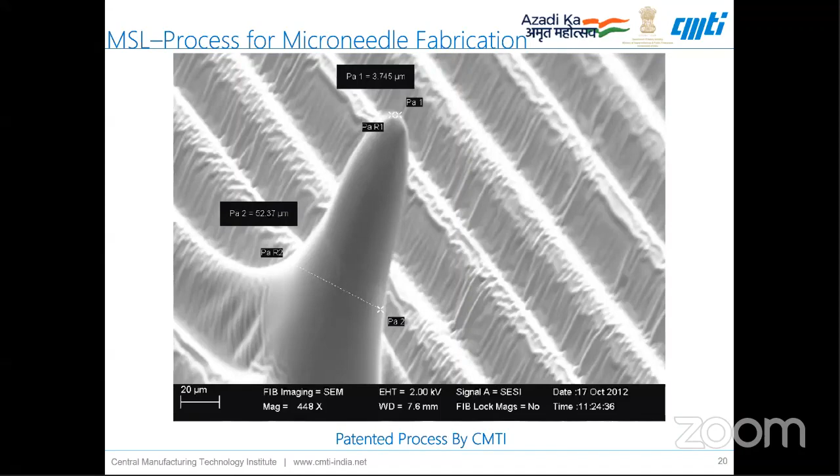So coming to another process called the super IH process, which is a very advanced process basically. The super IH process is also called two-photon polymerization. Here, the two-photon polymerization happens because of femtosecond laser interactions.

If you go to the atomic structure, electrons will be spreading in orbits, right? So when you give some energy to the outermost electron, it will jump to the next outermost orbit. So that's what happens. Actually, here localized photopolymerization happens with the two-photon interactions.

So how it happens is, let's assume one electron is orbiting in the S0 orbit. If you give one drop of energy, using normal light or laser, it jumps to the next orbit. This time is called the state transition time. In this time, if you shoot another pulse of laser, it will jump to the next outermost orbit. So instead of one-photon interaction, here two-photon interaction happens, so that it jumps to the next outermost orbit.

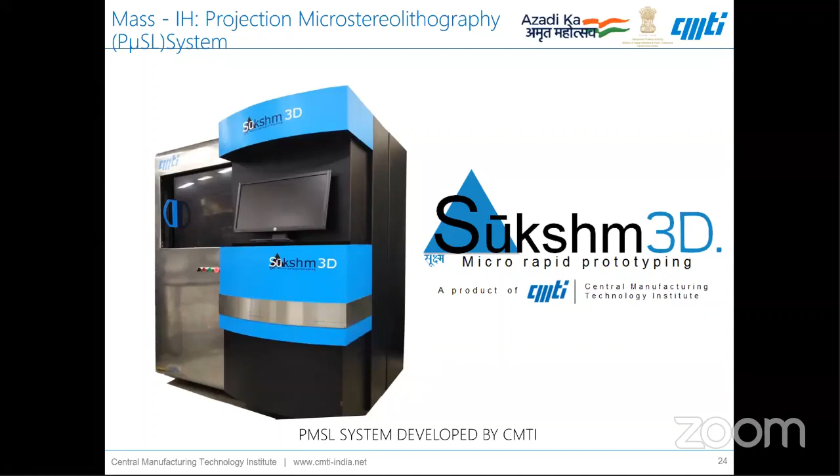So coming to the mass IH process, it's also called projection microstereolithography. It is the mass IH process, built in-house at CMTI. Here you can see the entire setup, which uses a UV LED and a collimator rod lens, and that UV LED will be focused on a digital micromirror device, which generates the patterns. The micro patterns will be projected onto the photocurable resin, so that photopolymerization happens, and micro components will be obtained using this process.

So this is the in-house built setup. Here you can see the actual setup, which is used for fabrication, in this enclosure. It uses a photocurable resin which is kept in a vat. This is the micro positioning stage, and this is the DMD chip. The DMD chip projects the micro patterns onto the UV resin, so that it starts curing.

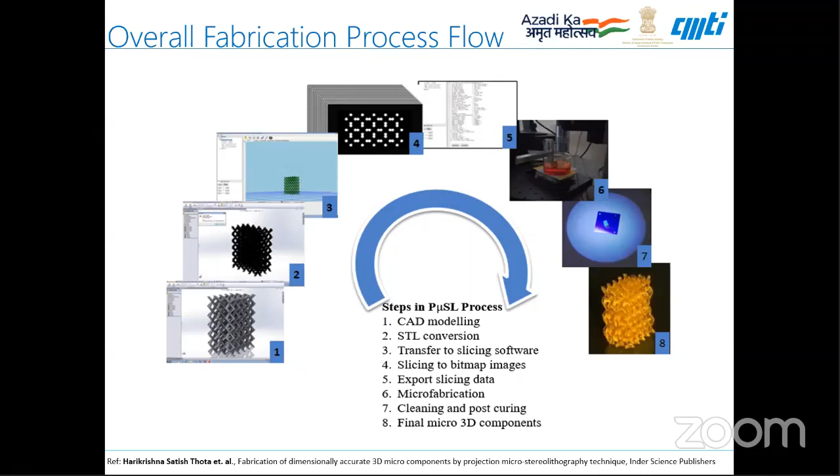The structure will be sliced into images after converting into STL format. Then the slices will be put to the DMD chip process, and we'll be setting up the process. So we will fabricate components, which will be cleaned, post processed and post cured, so that after curing we get the actual component which you designed in micro 3D form. So this is the entire process.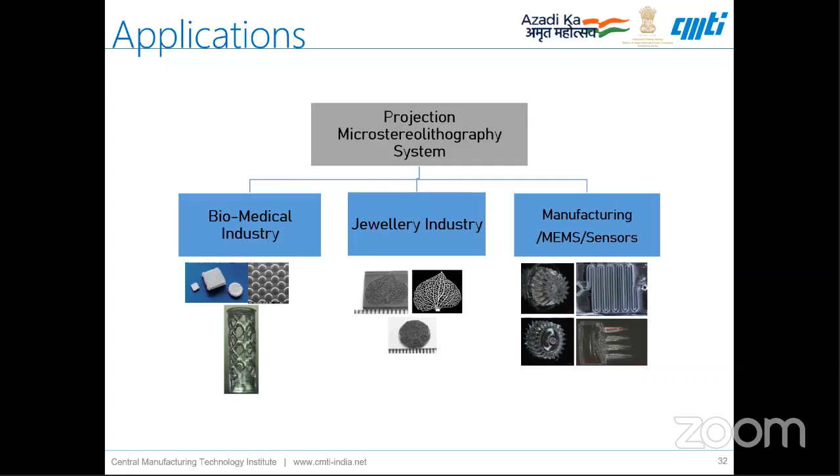So coming to the applications, the micro stereolithography applications are widespread into various industries: biomedical industry, jewelry industry, and manufacturing industries, MEMS and sensor fabrication processes. We can use this kind of technique. Coming to one application,

the microneedles. The microneedles can be used as microneedle arrays for biopotential electrodes. The electrodes consisting of microneedles will penetrate the skin, which is non-invasive. You will not feel any pain. It is a painless process. The advantage of using microneedles is you can acquire a better signal than the conventional techniques. So this is the project we have done earlier for one of the defense labs.

So coming to the biomedical components, the coronary stents basically. Metal stents have some disadvantages. They will be there lifelong, and clogging happens once again even after installation of stents. To avoid that, now people are going for novel biocompatible and biodegradable polymeric stents, so that they do their job and they disappear. There will be no further clogging of arteries even after installation of the stents. This is the ongoing research happening.

So for that purpose, we have already made stents with biocompatible and biodegradable material. You can see here the cardiovascular stents. The material used is biocompatible and biodegradable. This is the technology we have along with the equipment.

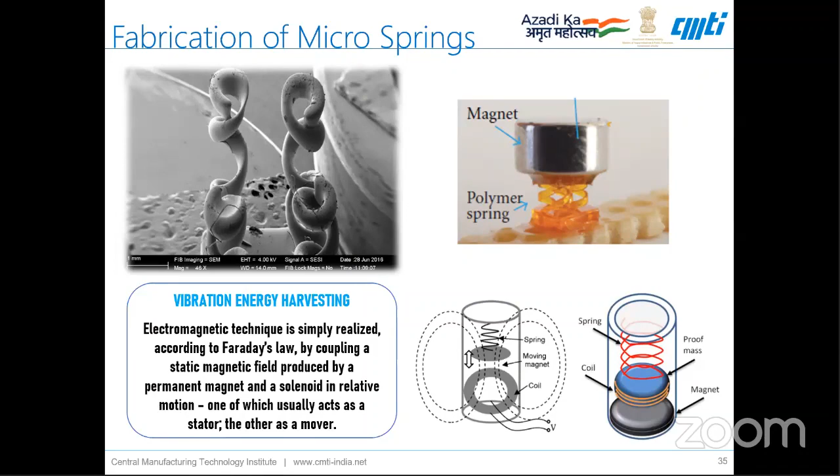Medical applications, as I explained already, one is for biopotential electrodes, another one is for painless drug delivery. We have supplied one of our customers for the same application. Even for mass vaccination, painless vaccination, you have concentrated drugs applied on biodegradable microneedles. The patch is placed on the skin and pressed, so that the needles penetrate and release the drug painlessly. That is the concept.

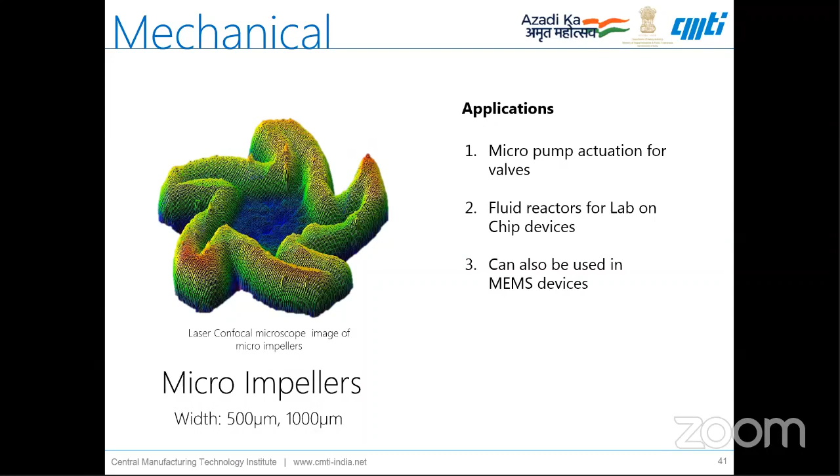Coming to the scaffolds, 2D and 3D scaffolds, you can use them for tissue engineering applications. Mechanical micro gears, we already showed. These are the confocal images of the micro gears we fabricated for MEMS applications, micro gears, components, and MEMS cantilevers. You can fabricate micro cantilevers, and for biodetection, you can put some antigen on them and use them for bioscience applications.

You can validate your design. Suppose you have a requirement for micro design, micro machine applications, or micro engineering applications. If you want to quickly validate your design, you can use this one and validate your designs. You can also do fabrication.

By mixing resin with a proportional quantity of nano powders, alumina or zirconia powders, you can cure it and get ceramic micro parts. It will be a ratio mix, actually 25% resin and 75% powder. That will be defined depending on your requirement, and you can fabricate ceramic components.

Once you debind it at 800 degrees, you get a green part. The green part is further sintered at 1600 or 1800 degrees centigrade to get the actual ceramic component. A shrinkage of around 20 to 25% is expected.

In this presentation, I'm going to cover the work we have done in laser micromachining activities at CMTI. We have two laser systems at CMTI, a femtosecond laser and an excimer laser. I will brief you about the work we have done using these two lasers.

So why do we use lasers for material processing? As all of you know, it is a non-contact method, unlike conventional machining processes, and no solvents or chemicals are used during machining. It is a very clean, environmentally friendly process, and selective material removal is possible. That means you can accurately remove surface material without affecting the material beneath.

We can machine a wide range of materials like fragile, ultra thin, heat sensitive, and highly reflective surfaces using laser machining. Going through the classifications, based on their source of emission, lasers are classified as solid state lasers like Nd:YAG and titanium sapphire lasers, semiconductor lasers like DPSS, diode pumped solid state lasers, and liquid lasers like dye lasers, which are used to study the emission and absorption spectra of various materials.

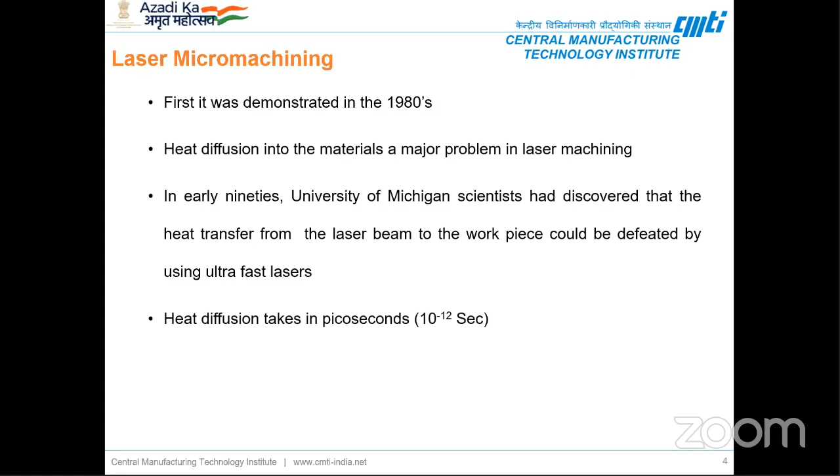That means heat diffusion takes place in picoseconds. If we use a laser with a pulse width lesser than this picosecond duration, we can easily beat the heat propagation into the material. So there comes pulse lasers. Ultra short pulse laser means pulse duration is less than 10 picoseconds. They are called ultra short pulse lasers.

They're also called ultra fast pulse lasers. Then long pulse lasers, if the duration is longer than 10 picoseconds, they're called long pulse lasers, where the pulse width is longer than the heat diffusion time.

There is also damage to adjacent structures due to the heat affected zone. Heat propagates through this heat affected zone, which can cause mechanical stress and create micro cracks. During use of this component, these micro cracks can propagate and cause premature failure. So we have to avoid the heat affected zone during machining.

It also forms a recast layer, which is a resolidified layer whose physical and chemical properties are very different from the unmelted material. This is a very mechanically weak section, and we need to remove this recast layer. Even if the spot size is 1 micron, the minimum feature size you can get with long pulse lasers is not less than 10 microns.

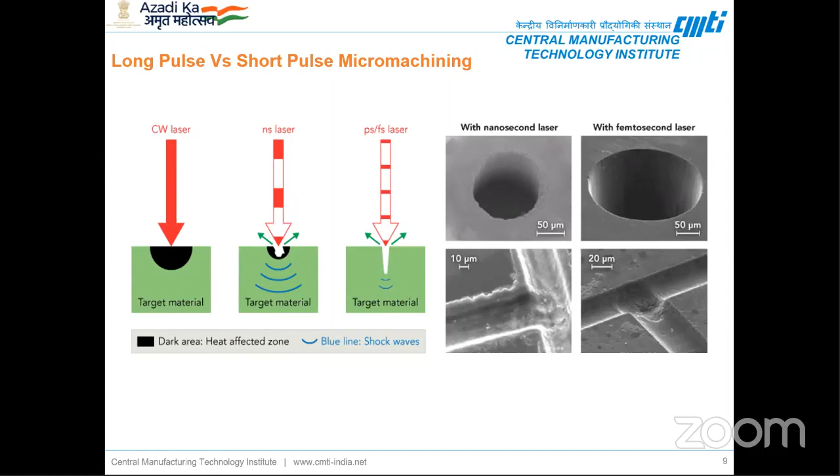Then coming to laser micromachining methods: direct writing and mask projection system. Direct writing is where you use the laser directly to machine or process the substrate, with a desired pattern fabricated by translating either the sample or the substrate, like in femtosecond lasers. Whereas a mask projection system uses a mask between the laser beam and the substrate. Whatever feature you want to create on the substrate, you need to have it on the mask. A given feature on the mask is illuminated and projected onto the substrate, like in excimer lasers.

The femtosecond laser system we have at CMTI is a Clark MXR make, having a wavelength of 775 nanometers and a stage resolution of around 1 nanometer. It has a laser output power of 1 watt and repetition rate of 1 hertz to 2 kilohertz. It has a pulse width of 10 picoseconds to 150 femtoseconds, and the traverse is around 150 by 150 by 100. The minimum feature we can machine with this system is around 1 micron.

So coming to the application of femtosecond lasers.

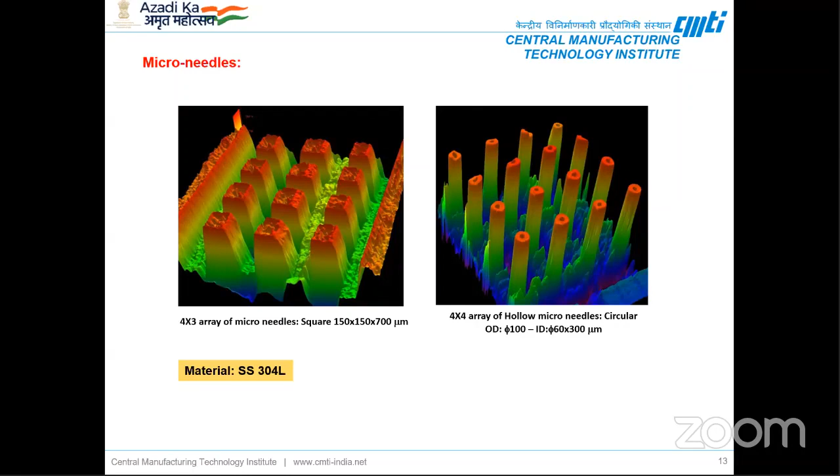Next is microneedles. As our colleague Mr. Hari Totta has previously explained regarding the microneedles, these are used in drug delivery, that is biomedical applications, and other applications. You can see the 4 by 3 array of microneedles, which are square needles of 150 by 150 cross section and a height of 700 micrometer. On the right side, you are seeing circular microneedles with an outer diameter of 100 micron and internal hole of around 60 micron, whereas the height is around 300 micrometers. They are done in femtosecond laser on SS304L material.

Next, master mask for sputter coating. In PVD coating, that is sputter coating, you need a mask to create designs on a substrate in a thin metal coating. You can create this kind of mask in femtosecond laser, because if the thickness of the mask increases, you will not get a very straight edge during the coating. Here the thickness we have used is a stainless steel sheet of 50 micron thickness. This kind of very thin sheet machining is not possible in any conventional processes.

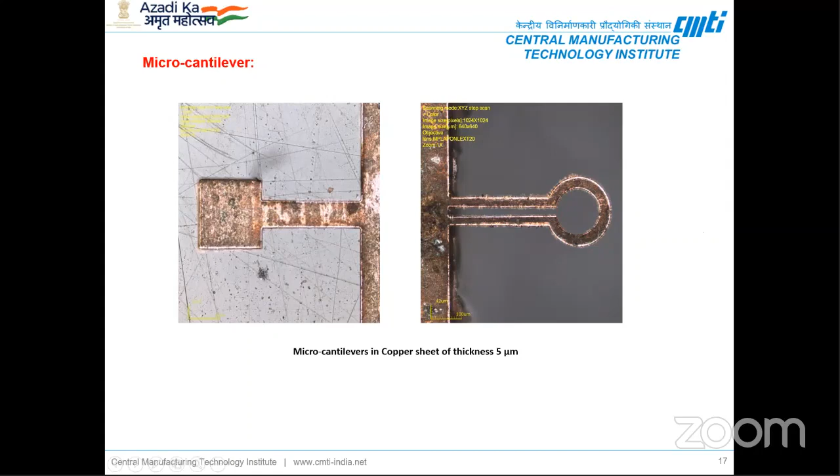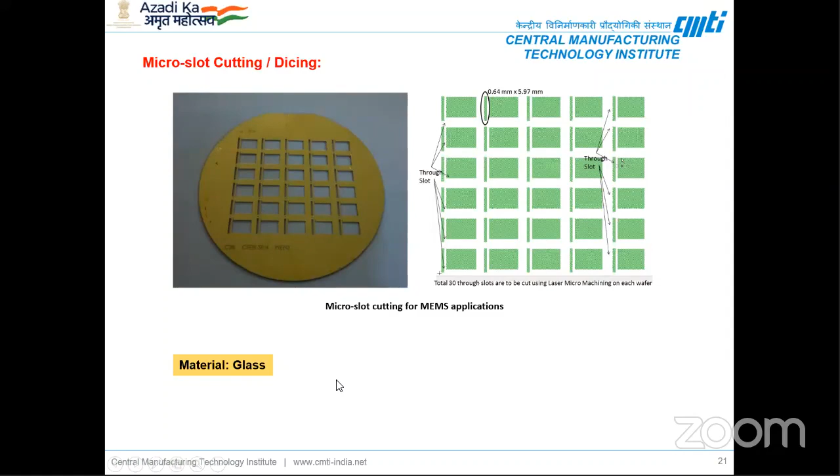Next, another application, this is internal R&D at CMTI. We have synthesized nanoparticles, basically copper nanoparticles of average size of 40 nanometer in colloidal form using the femtosecond laser. If you consider nanoparticle synthesis by chemical route, that is not desirable in medical applications. So one of the alternative methods is to get pure nanoparticles by using femtosecond laser ablation. Coming to the applications of copper and copper oxide nanoparticles - biomedical, industrial, environmental, and agriculture applications.

In biomedical applications, they are used in wound healing, antibacterial, antifungal, anti-cancer, etc. In industrial applications, electronics, superconductor applications, sensing, etc. In environmental applications, they are used in solar energy transformation, nanometal lubricant additives, etc. In agriculture applications, they are used as nanosensors to detect fungus infestations, food industry, and plant growth, etc. They have very good applications, and one of the alternate methods to produce these kind of pure nanoparticles is femtosecond laser ablation.

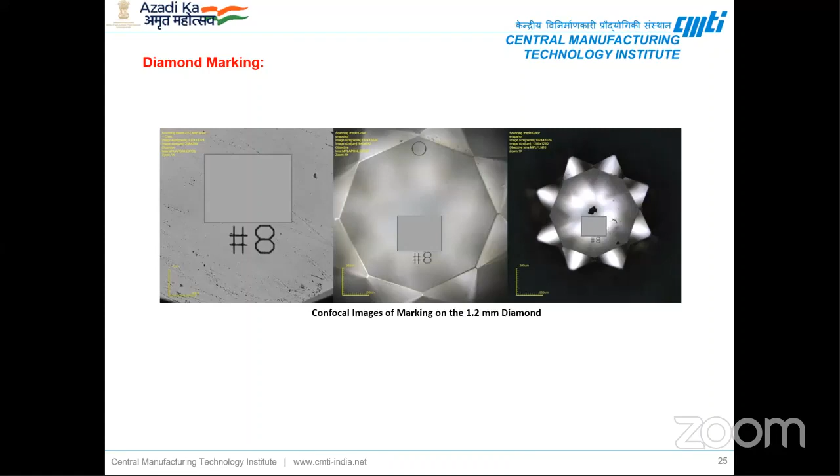Polymer, glass, metal, non-metal, even diamond can be machined. Another application for biomedical purposes is microhole drilling of vials and ampoules, required for CCIT testing. There is a container closure integrity testing that we have successfully established at CMTI.

After the femtosecond laser system, we have another system called excimer laser system. This is a UV laser system of Optec make, with beam delivery from coherent lasers. The wavelength has two options: 193 and 248 nanometer, that is argon fluoride and krypton fluoride.

The average pulse energy is around 400 millijoules for krypton fluoride and around 200 millijoules for argon fluoride. The pulse duration is in nanoseconds, around 20 nanosecond, and the maximum repetition rate is around 50 hertz. The beam size is 24 by 10 mm, a rectangular size. The minimum feature size we can machine with this system is around 1.5 to 5 micron.

We use a mask between the beam and the substrate. The maximum size of material we can handle is 200 by 200 by 50 mm.

Some applications of excimer laser system are in biofilters, ceramics, then collector channels of around 100 micrometer feature size, then micro lens such as fiber coupling lenses, wire stripping, and we can even fabricate polymer stents using excimer lasers.

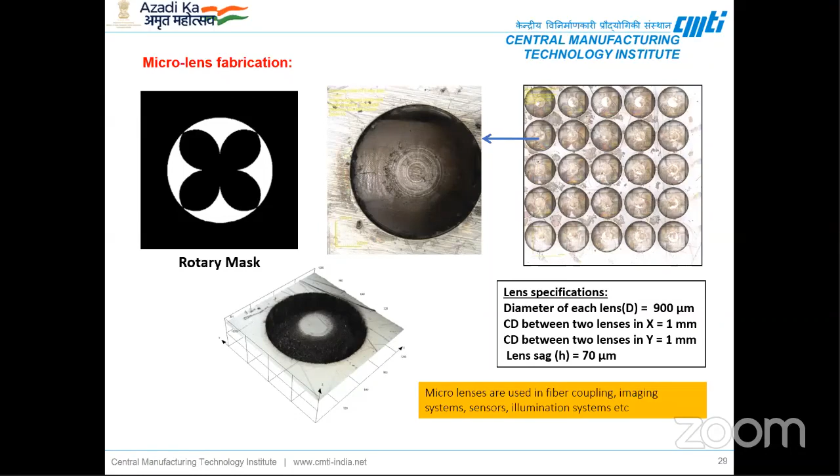Another application is thin metal coat etching, similar to the previous application, such as etching of chrome coated glass used in EMI applications. One important application of excimer laser is that you can remove any thin metal coating without affecting the base material, that is, selective material etching can be done.